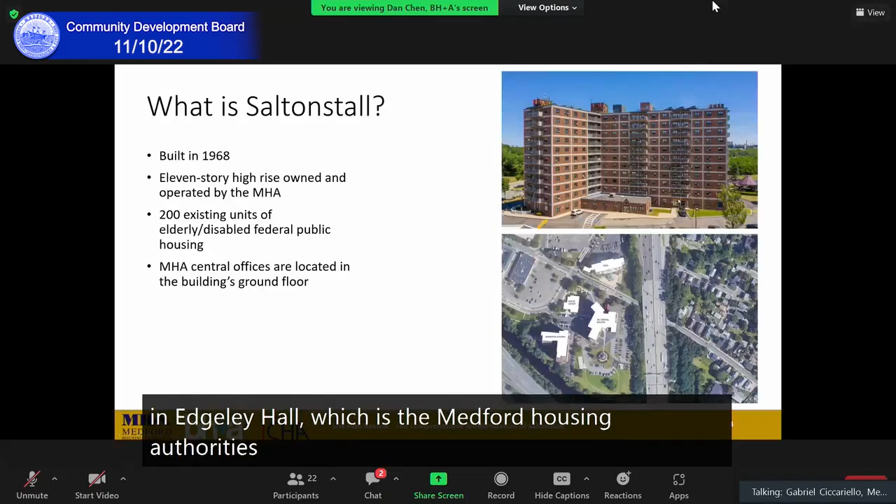Edgerly Hall, which is the Medford Housing Authority's largest community center, is also located at 121 Riverside Ave. It not only serves our residents, it serves other Medford Housing Authority residents within our portfolio and also the greater community. It gets a lot of use. We hold things like flu clinics, not only for our residents but for the greater Medford community, COVID clinics, food programs, exercise classes. It's a very busy building, it gets a lot of use, and the community room serves a great function to our residents and also the greater Medford community.

So the current building conditions—as you can see in these pictures, the building from far away looks okay, but when you get up close, it's far from okay. The majority of the brick is scaled and pitted. We've had to vacate several units because of severe water intrusion. The building structural beams need to be reinforced. The exterior masonry walls are severely deficient, with cracks and leaks. The ventilation system is poor.

The plumbing and electrical is all original to the building. The fire protection systems are not functioning properly and need to be upgraded just to get up to today's code, to be code compliant. The unit bathrooms have bathtubs in them, which are not great for accessibility and for elderly disabled people. The kitchens are in poor condition and warrant replacement. The common area corridors are not properly ventilated and do not meet ADA requirements. A portion of the units need to be upgraded to become fully ADA accessible and code compliant.

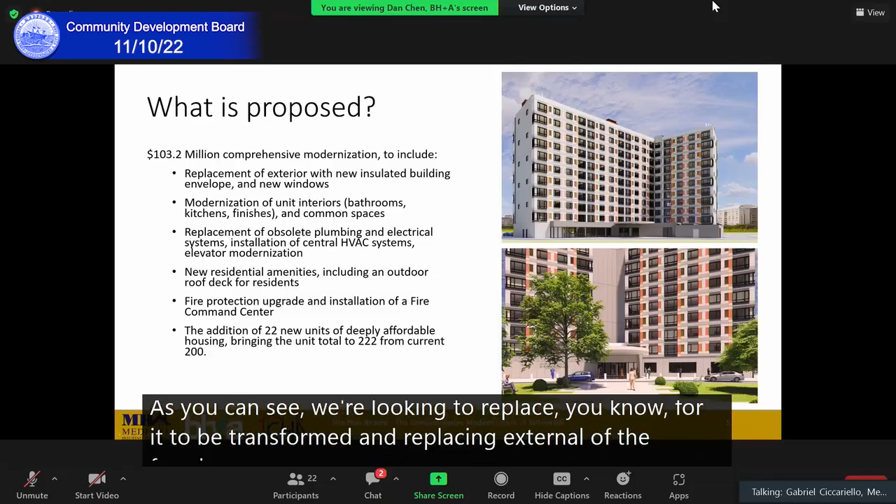So what is proposed? We just signed a guaranteed maximum price with our CMAR contractor for $103.2 million. We're looking to replace the exterior facade with a new building envelope and new windows. We're going to be modernizing the unit interiors, bathrooms, kitchen finishes, and common spaces, and replacing the obsolete plumbing and electrical systems. We're also looking to bring central air conditioning and heating, and modernizing the elevators.

With new residential amenities, we're upgrading the community spaces and adding an outdoor roof deck for the residents. We're adding fire protection upgrades and installing a fire command center. By adjusting the unit configurations and layouts a little bit, we're going to be able to add 22 new deeply affordable units within the building. We're not adding square footage, just reconfiguring the units. We're going to be able to go from 200 units to 222 units.

And so the project timeline. As I stated, we just entered into our GMP with our contractor. Our financial closing is anticipated to happen before the end of January, and construction will start soon thereafter. So early February, we are looking to start construction, with the anticipated end date hopefully May, could be June 2025. We're looking at a 30-month construction duration.

And so for our existing residents that are on site, the resident relocation process. We're looking to get up to 70 vacant units during construction. That's not going to happen right away, it's going to be a phased, eased kind of progression. But we're hoping by maybe the summer or fall of 2023, we get up to 70 vacant units.

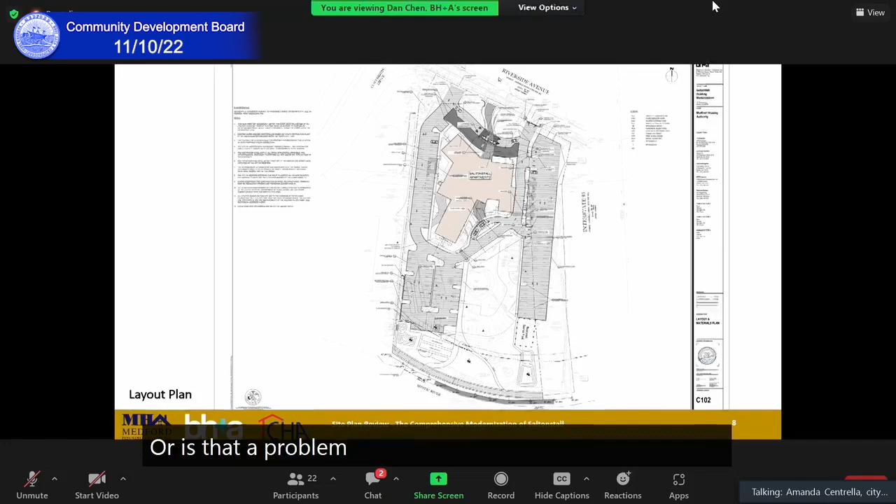Thank you. Good evening, Steve Sawyer, GM2. Amanda, would it be possible - sometimes it's easier for me when I present the site to have control and point and zoom. Would it be okay if I could take over and share my screen, or is that a problem? Yeah, no, that should work just fine. Okay, does Dan... okay, perfect. There we go. All set? Yep, we can see you.

Okay, great. So here's our site: Riverside Ave to the north, Interstate 93 to the east, Mystic River to the south, Clipper Ship Drive, and I believe there's an apartment building to the west. Currently, the site access is enter only and exit only, a counterclockwise circulation around the site.

As part of the building improvements, we're going to be reconfiguring the parking and improving vehicle access on the property. We are going to maintain the 2 curb cuts - those are not going to be changed. There's currently a front drop-off area that's going to be improved with a tabletop area, flush entering into the building, ADA compliant with no curb. There's also going to be a 20-foot wide fire lane added in the front. It would be a paver surface, decorative and appealing, but it provides access for fire trucks. There's a mountable curb here, so normal drivers would know not to drive over it, but it's easily mountable for a fire truck or fire apparatus.

As far as the parking now, it's on the outside and parks to the right. We're going to be shaving this down a bit - we don't need the width. We're maintaining parking here, and we'll be centralizing some parking down to the south. You can see in the faint red, that's the existing parking and curb line. Currently the circulation loops way down towards the river and runs back. We're going to tighten that up, keep it tight to the building, for better access for fire and more centralized access to the building.

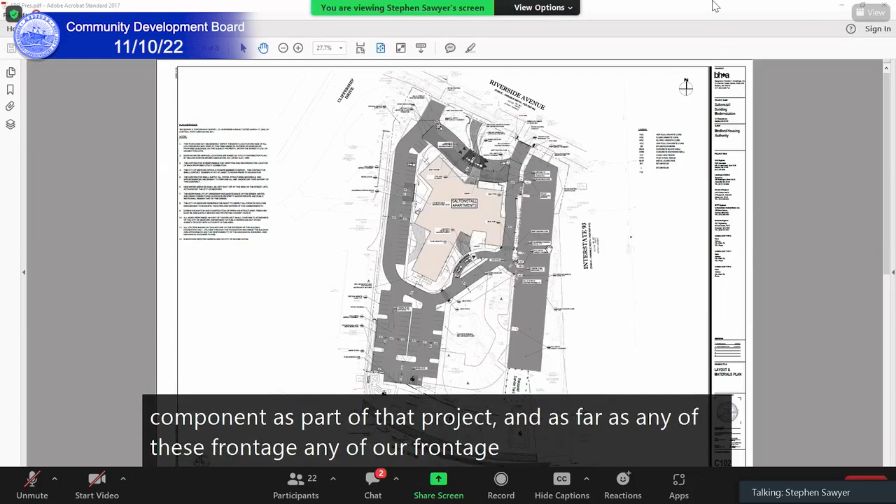One of the comments from engineering was about ADA along Riverside. Currently these have tactile paving and look like they've been replaced recently. The exit, though, those are not compliant, and we'll be bringing those into compliance as part of that project. As far as any of our frontage that's non-compliant, we'll be making those improvements to bring it into ADA accessible compliance.

Let's see... why is this... uh-oh, this isn't good. My thing just should say... boom. Just bear with me a second, hopefully it'll come back. Oh, that's not good.

Hold on, bear with me, I'm going to reboot my Adobe. Sorry. If you want, I can share while you talk. Yeah, I was trying to get to my next slide, hold on a second. All right, well, I guess that ain't going to work, unfortunately.

Okay, so as far as stormwater, as you can see, on the east side, on the west side, on the entry side, we've pulled the parking back a bit, the edge of pavement back. Currently, it's only catch basins that are daisy chained, which pretty much fire the water right out into Mystic River untreated.

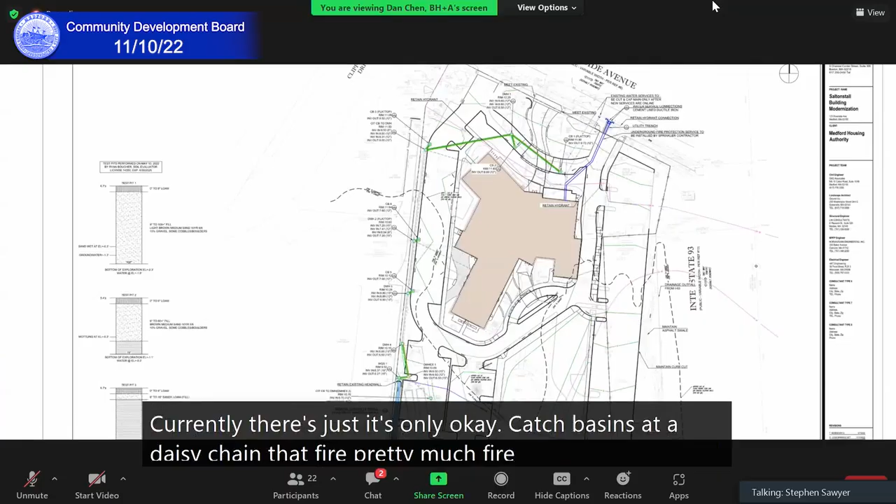If you zoom in, you can see the heavy green is the new drainage. We're providing new deep sump catch basins along the entry, and there's a new catch basin on the west curb line, the left curb line. These catch basins will be deep sump catch basins that remove the heavy sediment, and we're tying into the existing drainage via a 15-inch concrete pipe that runs down along the west property line as we work towards the Mystic River.

As you work down further south, you'll see the next catch basin. That catch basin will be offline. There'll be another catch basin offline, deep sump for sediment removal. At the very end, you'll see the last structure added will be what they call a swirl particle separator.

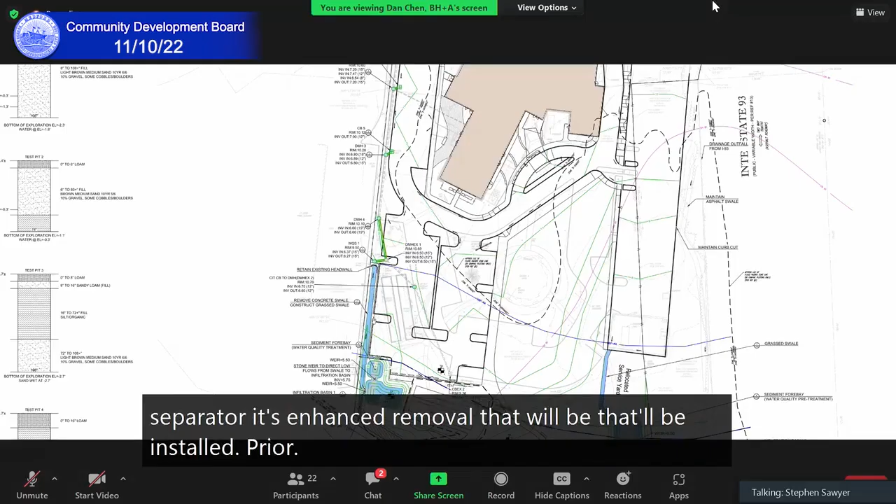It's enhanced removal, and that'll be installed prior to the water being discharged to the swale. Currently that's a paved swale, it doesn't provide any treatment, it just shoots the water right out into Mystic River, untreated.

So this is going to be a vegetated swale. It'll direct the water into this bioretention area here, where the water will be held, treated, infiltrated, and then during the larger events, it'll be directed back out to the swale and then into the Mystic River.

This system is going to be designed to treat all of the pavement, full treatment for the paved areas. As you're aware, DCR is working to put a trail along the top of the bank, and we'll be tying in. They're going to be making some improvements where the stormwater flows into the river, and we'll be tying into their improvements. On the east side, you can see there's another large basin.

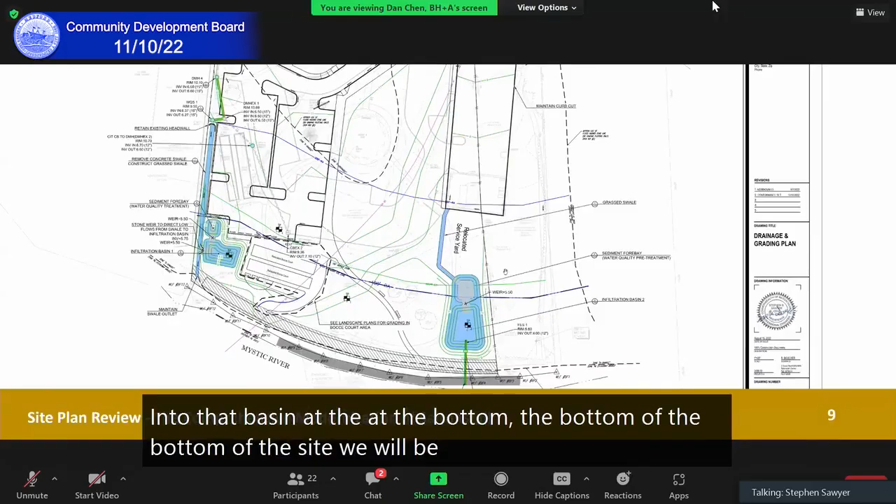That's going to take the eastern half of the site. Most of that site sheet flows over the parking through a swale and then into that basin at the bottom of the site. We will be installing a new overflow structure that will convey the water into the Mystic River. Once again, all of the paved areas will be providing the full 80% TSS removal and recharging stormwater back into the ground.

One thing of note, I think one of the comments Owen mentioned was resource areas. I believe you may be aware we're actually in front of the Conservation Commission now, so they really delved in detail into the stormwater. We did get some comments from Conservation, we are responding to those comments, and these systems will be updated.

To address their comments, they won't change much. Maybe they might grow slightly, but for the most part they're going to remain in both of the locations and operate as shown and intended on this plan.

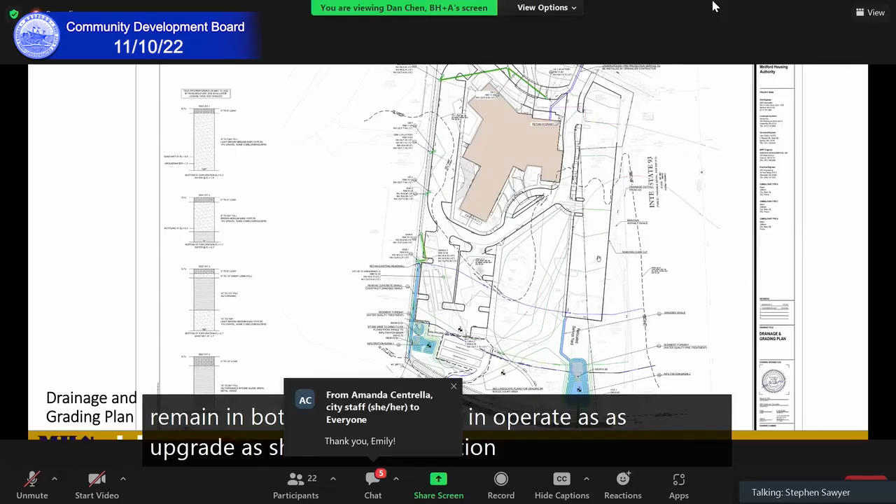In the comments, Owen, the city engineer, agreed with the approach, but said prior to building permit he'd be looking for detailed stormwater calcs, which were actually submitted to the Conservation Commission. I'll be submitting revised calculations probably on Monday, and I'm going to forward him a copy for review so he'll be reviewing concurrently with the Conservation Commission. And as far as the water utility off of Riverside, we're going to be providing...

You can see the blue.

This is going to be a new fire and potable water system. One comment was that we weren't allowed to do tapping sleeves. Owen asked for a triple gate, which has been added here. What that means is you add a gate on the existing line to the left and to the right, so you can isolate issues on either side while the building stays in service.

One item Owen brought up was providing a looped 8-inch water system around the entire building for fire service. We are not providing that. That was one of the comments we disagreed with.

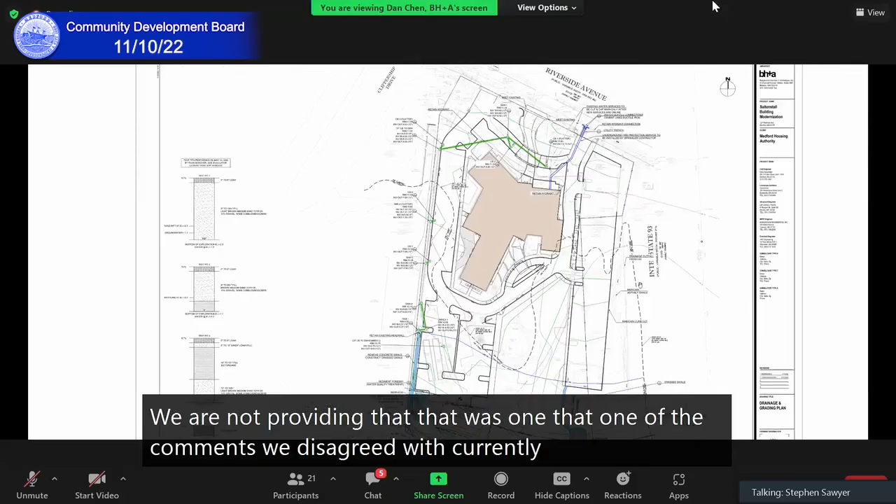Currently there are 4 hydrants at the front of the building, and fire connections all around the building. This design, including the access and fire connections, has been reviewed and vetted by the Medford Fire Department, and they're okay with the design as is. At this time we don't see the need to go through the expense of looping a water line around the entire building—that would be a tremendous expense that's not necessary.

I'm trying to keep it brief, so I'll stop my presentation now and take questions at the end. Great, thank you.

Next is landscape architect Curtis. Yeah, thank you.

The main landscape interventions are improving the building entry points, creating amenity space for residents, and the riverside area. I'll dive into each after the overview. Overall, the permeability of the site is being increased from 78,000 square feet of permeable area currently to over 80,000, or from 42% of the site area to 43%.

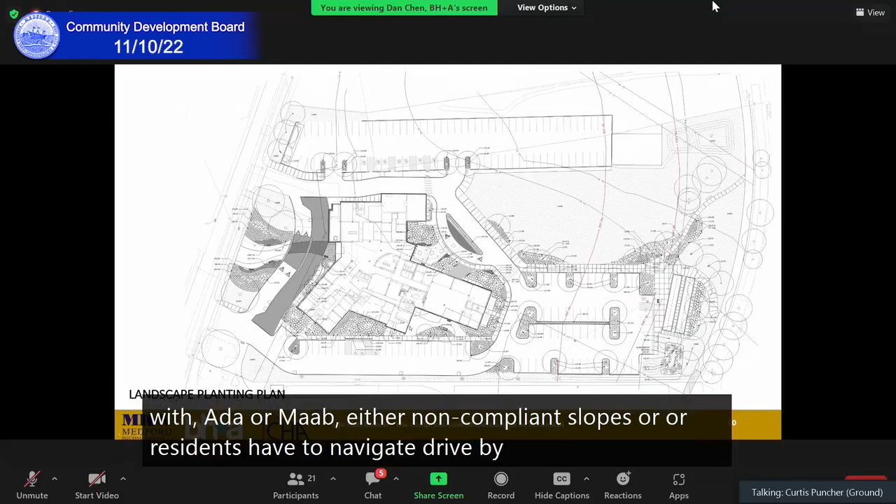Focusing on the building entries, a lot of the improvements are aimed at accessibility and drainage. Currently, many approaches to the building aren't accessible or compliant with ADA or MAAB—either non-compliant slopes, or residents having to navigate drive aisles to reach the building entries. So the two main building entries, front and back, will be flush conditions, so residents can be dropped off without navigating a curb or ramp—it's flush from the drop-off to the door.

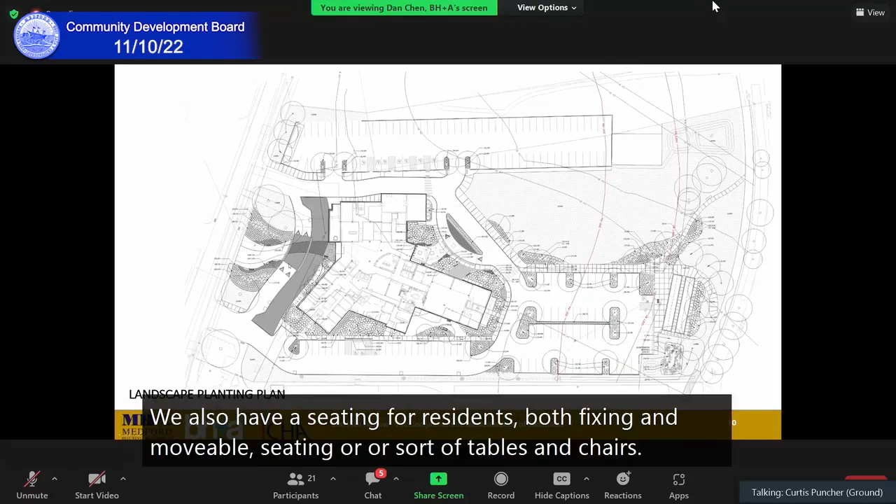Also at these sites, that's where we're concentrating our planting. We also have seating for residents, both fixed and movable seating, like tables and chairs, so we see these sites as opportunities for residents to socialize outside and gather.

Speaking of gathering, we also have a small resident amenity space adjacent to Edgerly Hall. The idea is that this community space can open up and spill out outside. We're going to have outdoor grills there and more seating opportunities—improvements for residents and users of that space.

Moving on to the Riverside area: we are moving the bocce courts, which are a City of Medford amenity, closer to the river. We'll maintain the dedicated parking spots for the bocce courts, and they'll be reconstructed at the originally constructed size for the courts.

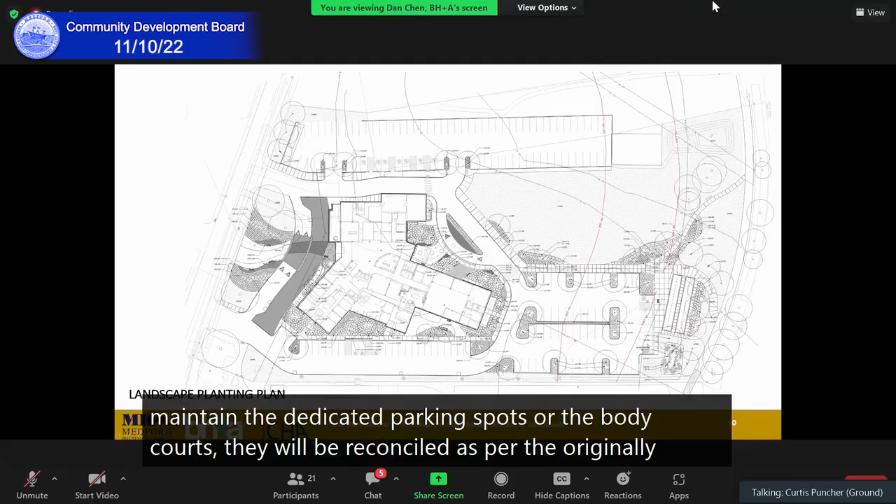We are adding seating opportunities around that site, concentrating planting around the bocce courts with some trees for shade. We're tying this in to the Clippership connection path along the river, seeing the site as a node along this path where users hopefully stop, stay, visit, and use the bocce courts.

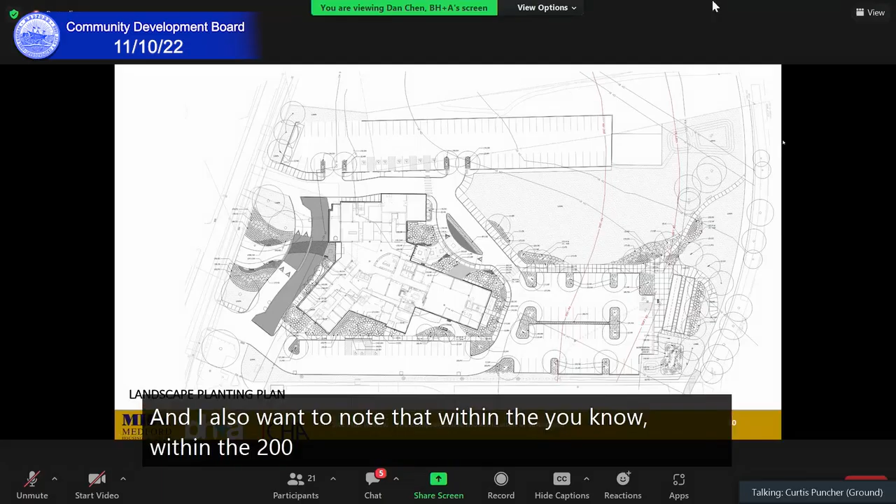I also want to note that within the 200-foot buffer of the boundary, the vast majority of the planting is native. We do have a small clump of hydrangeas we're not married to—if people have an issue with that, we're happy to change it out. But most of the planting there, about 95%, is native shrubs and grasses mainly.

Okay, I too want to keep it brief.

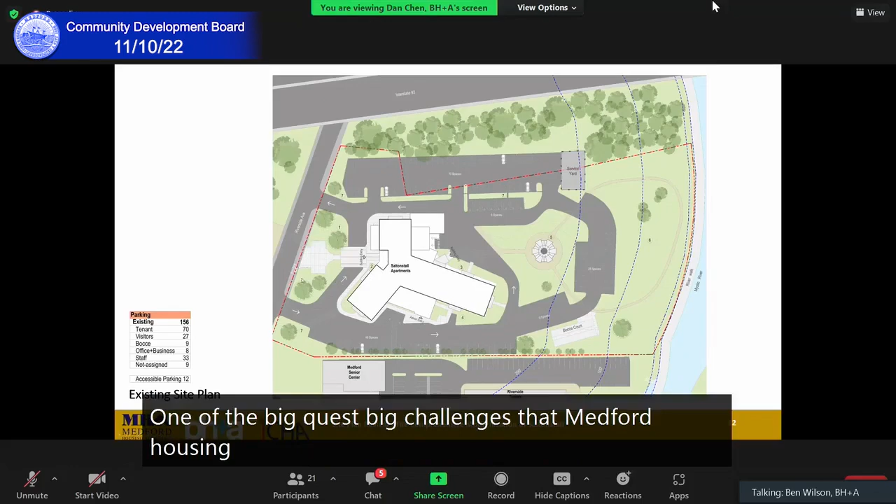The second issue is at the front of the building. One of the big challenges Medford Housing put in front of us is that this existing drive loop, which looks like and should be a nice functional driveway for drop-off access, is also the fire lane. So there was a real conflict—every time an emergency vehicle comes in, it would create a backup of traffic circulation and people double parking, and suddenly it's a log jam. That was an area we wanted to address.

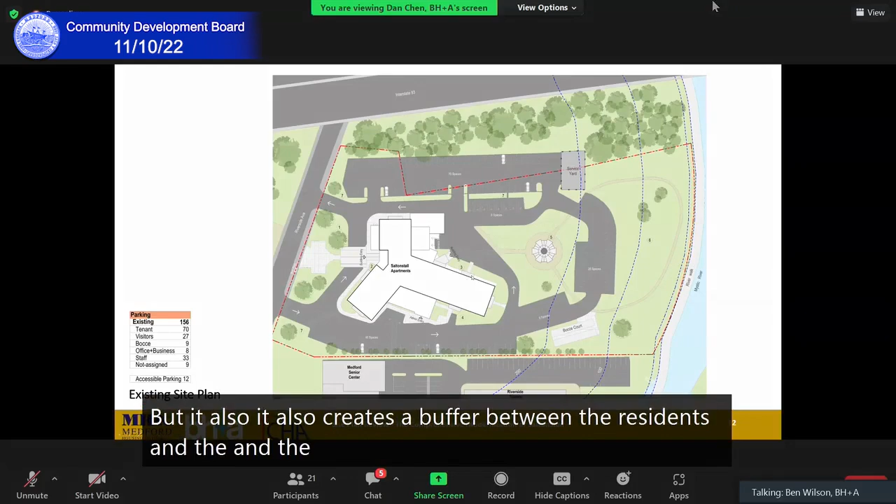The third item I'll mention is that the southern portion of the parking extends past the bocce courts and creates an outer loop of parking. It was felt that this aspect removed vehicles away from the building but also created a buffer between the residents and the waterfront amenity. So we were trying to create more of an expansion of the site outward in that direction.

Moving to our proposed plan, addressing the maintenance vehicle problem was easy—we convinced the housing authority to move their maintenance department somewhere else. That was a relatively simple fix, and the space that was the full maintenance department is now mechanical equipment and a smaller, building-specific maintenance area which accesses off the driveway instead of the pedestrian area.

The parking now circulates so that it feeds to identifiable walkways. One of the other problems from the original plan is there was no clearly defined pathway—unless they painted it out—just a lot of open no-man's-land of asphalt. We're trying to create more identifiable circulation that would be more functional.

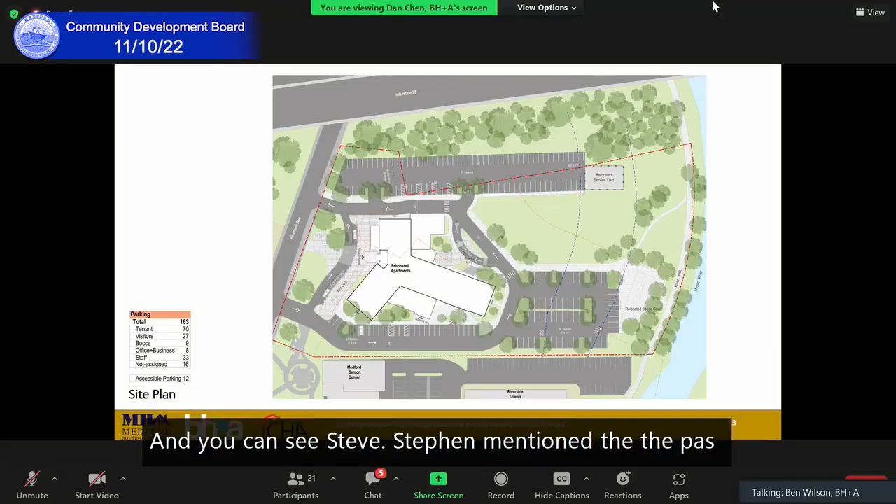You can see, as Stephen mentioned, the passage past the west side of the building where we flipped the driveway and the parking, so now the parking is on the building side of the drive aisle. That's also the area where there's an entry into the administrative wing, in that corner. The administrative offices are accessed from that point, and the parking serves that dual purpose.

Another simple benefit we gained from the parking modifications is that the 9 spaces corresponding with the bocce courts are now actually adjacent to the bocce courts instead of across a drive aisle. So we're trying to get things to be more defined and isolated.

The two entry areas of the building—we really have a double entrance. They're connected on the inside through the lobby space, but the entry from the north we're trying to reduce to bus traffic and foot traffic from town, as well as Uber and drop-offs. We've emphasized the south side of the building as more resident-oriented—this is where your front door is as a resident using vehicle access.

Another drop-off was mentioned by both Stephen and Curtis—the flush paving, tabletop access to it.

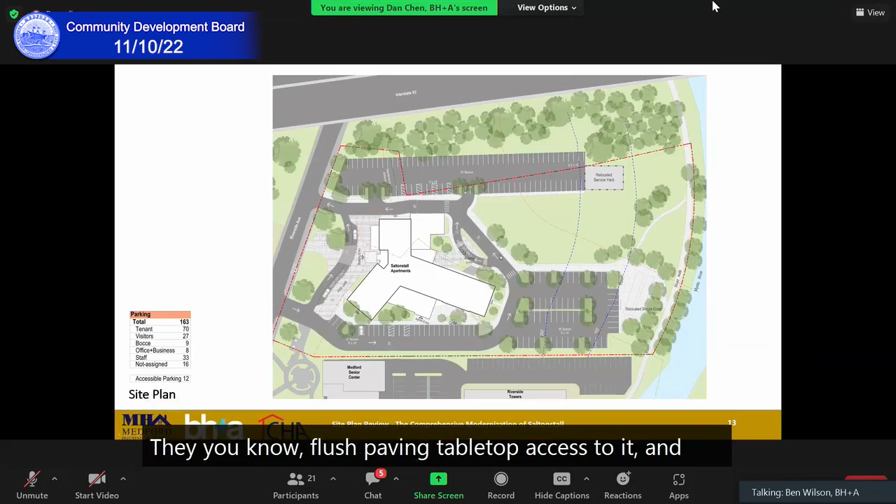The last thing I'll comment on regarding circulation and pedestrian flow is the connection from the public right-of-way to the riverfront. We've maintained a continuous walkway surface on the east side of the building—Dan's pointing to that access—and it's a nice, wide, very public sidewalk that accesses from the public right-of-way of Riverside Avenue past the bocce courts to the Clipper Ship Trail, with a couple of separate spurs to tie in additional options as walkers might prefer.

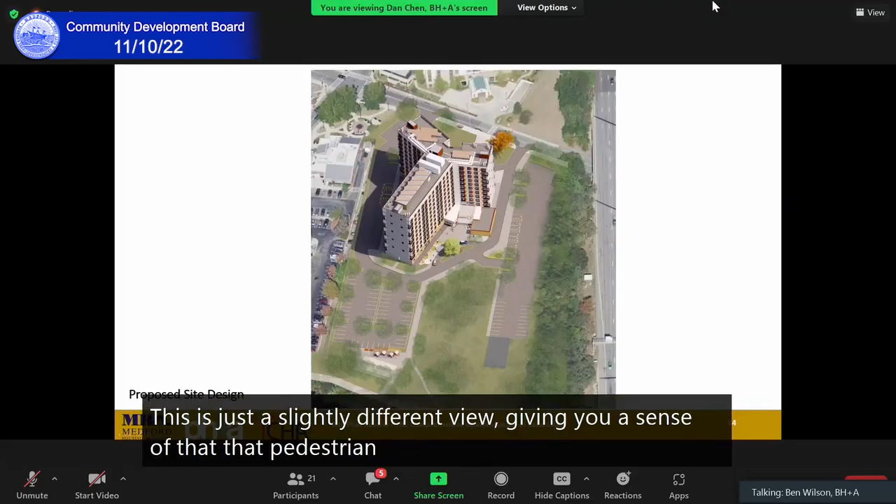So pedestrian wise, I think that's really where we tried to target it. This is just a slightly different view, giving you a sense of the resident entry area with the drop off and the maintenance building, and you can see it kind of projects out into that space. We've really been able to address the current maintenance use of that building, being specific to the building, which will be quite light.

So again, the circulation of the parking can channel onto a sidewalk and then a simple crosswalk into the building area. This slide shows the ground level of the building to show you how the two different entries on the south side and the north side tie together into a common space, trying to bring that outdoor public sense or community sense into that center area of the building at the elevator and mail area.

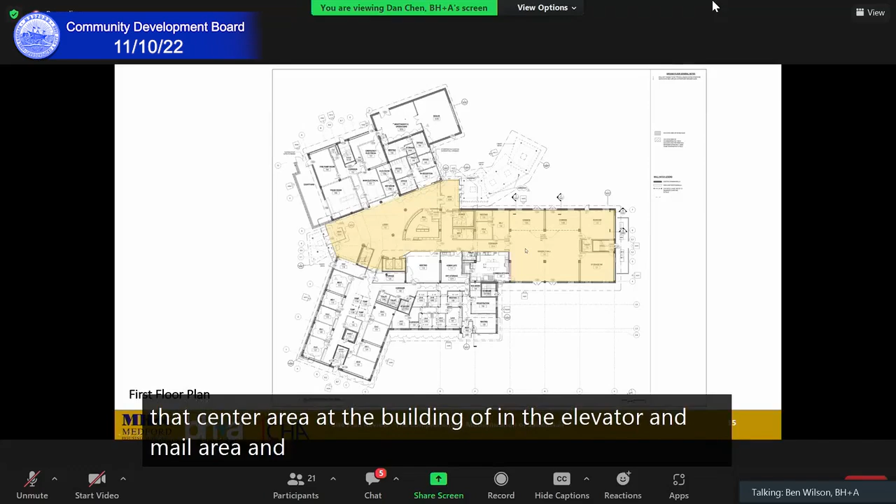And the south wing, you can see, is the Edgerly Hall spaces, which are multi-use type spaces. That's quite a large space and has a fairly significant capacity.

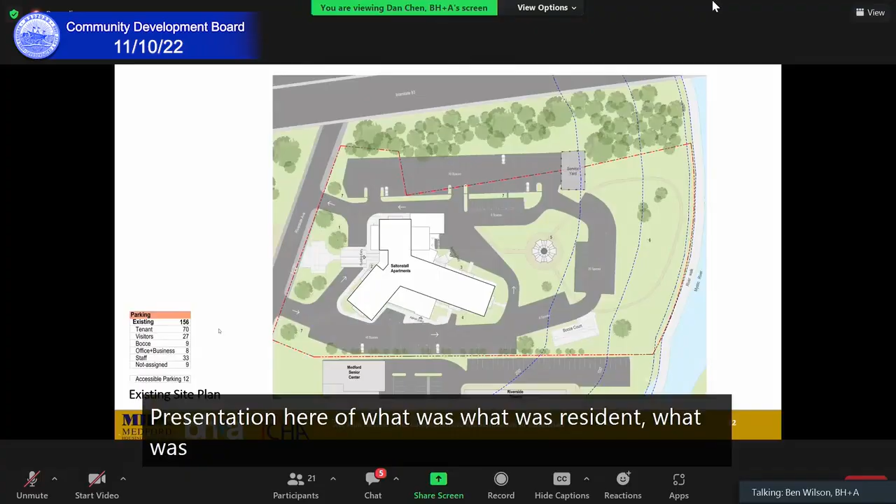Before you go, Dan, I'll just quickly comment on the parking. We started with 156 parking spaces, and there's a breakdown in the presentation of what was resident, what's office. So existing, we had 70 resident users, 27 visitors. The bocce courts were allotted 9 spaces. Office and business for the building itself was 8 spaces, and then staff for the Medford Housing Authority was 33 spaces, which left 9 unassigned spaces. Of all of those, 12 are accessible.

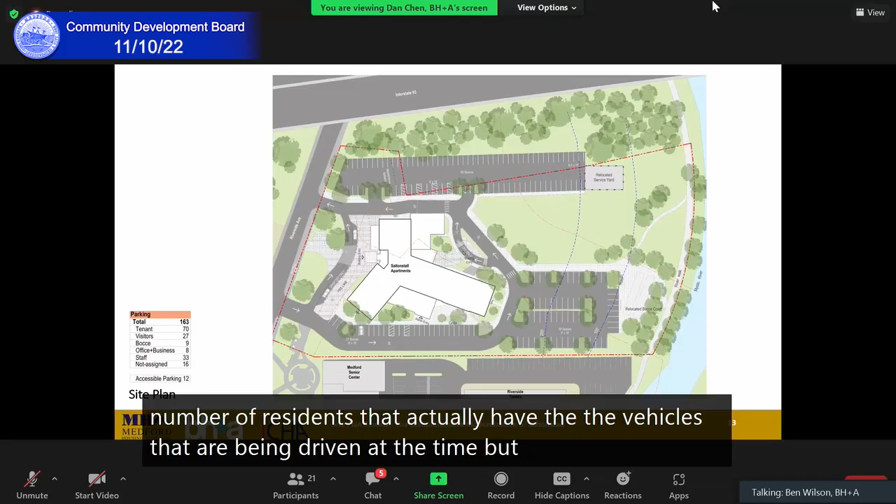So moving to the new plan: we actually picked up a few parking spaces through more efficient use of area, so we're up by 7 parking spaces. But as was mentioned, we're adding 22 units to the building, so we're adding 22 apartments at a 0.5 ratio, which means we're looking to add 11 spaces required. We maintain the 70 listed here because that's the number of residents that actually have vehicles being driven at this time. But in terms of code required spaces, we're about 6 spaces over what's required by code at this point.

So moving on from the plan, I think we can address other pedestrian questions that you may have. I think I covered the main points. There were a number of questions related to how we approach the exterior of the building, the envelope modernization.

Let's go on to the first slides. I'll start here with a recap of the challenges. There were a couple comments made about thinking the condition of the building was really pretty good. But as we got into the project, there are some significant issues. We knew there were problems with water, and sometimes that can be pretty easily addressed, but the extent of the water problems here is pretty dramatic. There are areas where water is penetrating through into the structure, and energy-wise it's really quite an inefficient system.

The water penetration has been such a long-lasting problem here that it's created some pretty serious structural issues, corrosion in particular related to the balconies. The framing members from the balconies, which were structurally undersized to begin with, have in some cases been reduced by 20% in terms of steel thickness, just from corrosion-related issues. Water is penetrating through the concrete systems and right into the floor areas.

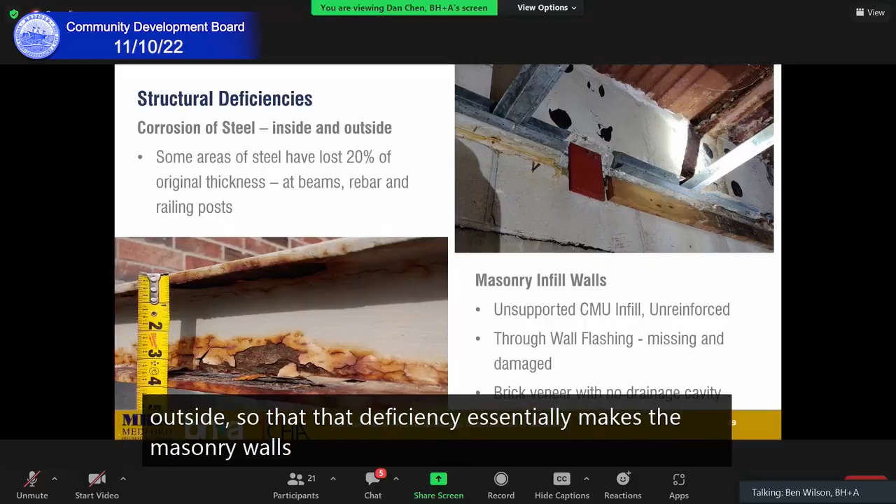The other aspect of the envelope strategy is to remove all, or most, of the brick masonry infill due to its condition. In terms of the upper floors of the towers, we'll be removing almost all of that brick infill. The reason we're doing that, rather than repairing, patching, and protecting, is that structurally the masonry walls were not reinforced and were not connected to the structural frame of the building, the concrete beams exposed on the outside. That deficiency essentially makes the masonry walls non-functional structurally from a design standpoint. So we have to go into the building and add brace framing to accommodate current code requirements and new loads. We're also removing all of that masonry to make a much more effective envelope, so there are really some benefits in doing that.

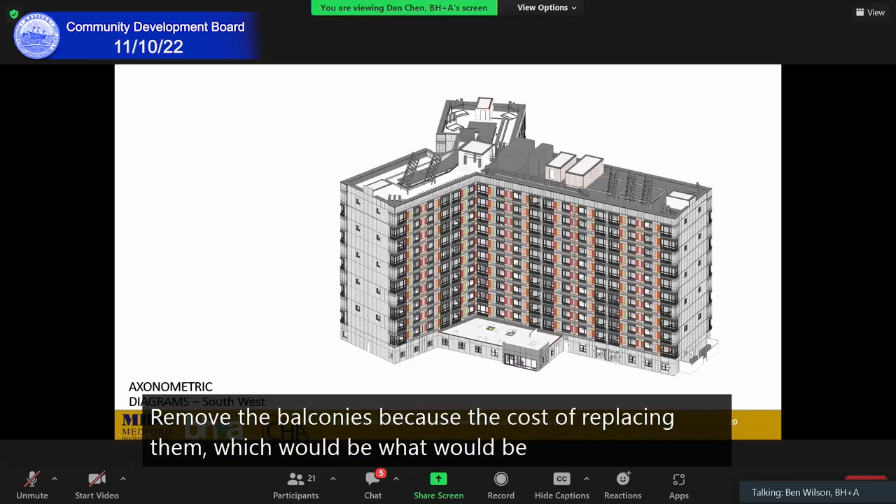And we removed the balconies because the cost of replacing them, which would be what would be required, is way outside of our reach of our budget.

So the building design, the way we've approached this, is we're proposing a fiber cement panel system on a rain screen. What that means is there's a framing system attached to the building wall substrate, and there's a waterproofing barrier, with the insulation applied outside of that waterproofing barrier. This allows the building to be insulated in a continuous way, without thermal bridges and whatnot.

The system drains and ventilates itself. So what we're adding is about 5 or 6 inches of wall material to the outside face of the building, and that's what we're referring to as a rain screen.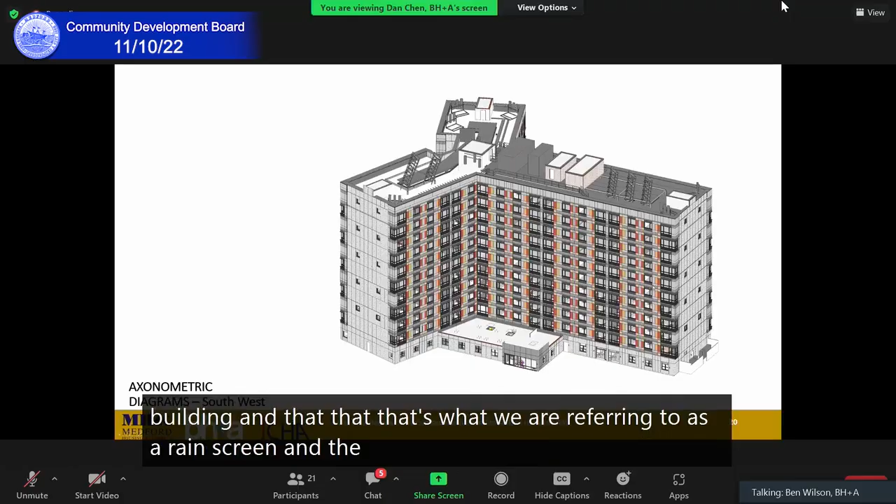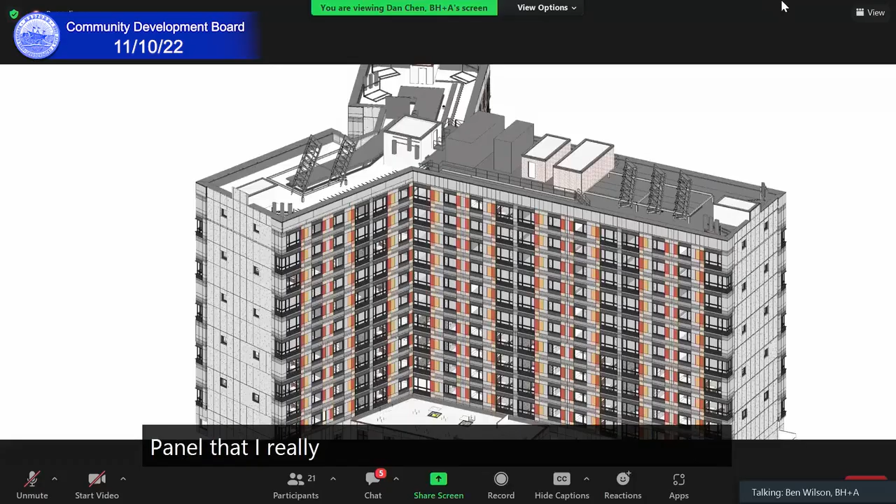The panel system, you may be familiar with fiber cement panels made more locally—I won't use any names, that could get me in trouble—but there are low grades of fiber cement panel and there are high grades. What we're dealing with is what's considered a high density, through-body-color fiber cement panel, so the coloration goes through the entire panel. The intent is that it's a much higher grade, longer lasting, durable panel that can really withstand the weather exposure of this environment with an 11 story building.

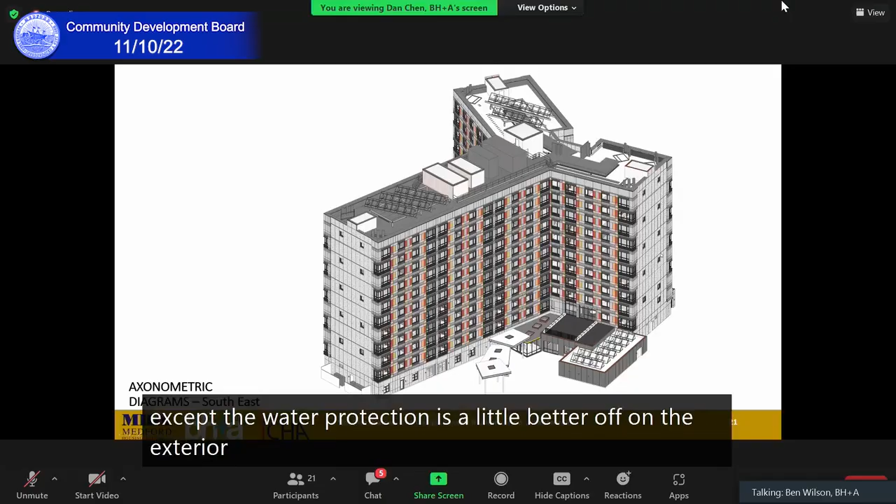For effort and cost savings in the project, dealing with the design we have, on the end walls of the big Y design, we've gone to an EIFS system. Quite often EIFS is kind of frowned upon, but the beauty of it is that it works almost exactly like that rain screen, except the water protection is a little better off on the exterior. It still drains, and it's still the same kind of insulation system.

So it's not a flammable foam like many people have seen EIFS applied as, but a mineral wool type system. What we're doing is really using the more costly panel system and rain screen around where all the windows are, on all faces of the building, and then using a cut section or cap at the ends of the Ys with this larger, larger-scale kind of panel that's EIFS.

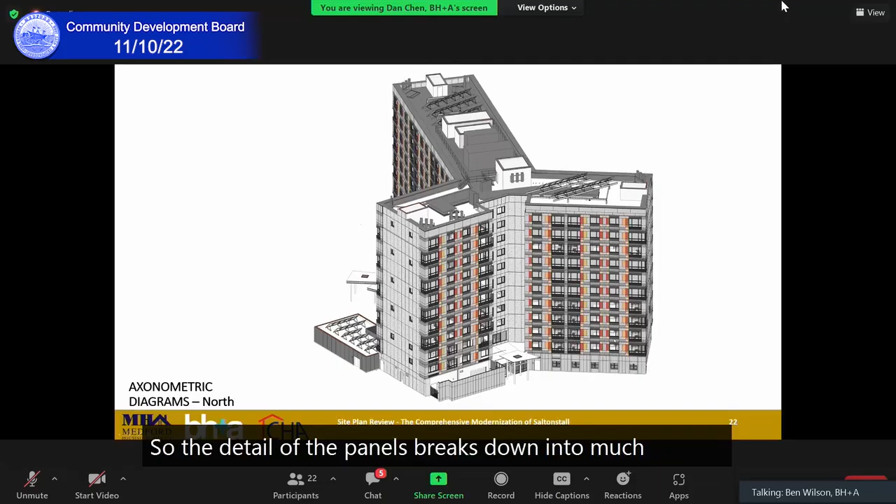And then at the base, when that all comes down, we're treating it as more of a monolithic, different treatment of panels. So the detail of the panels breaks down into more of a larger, rusticated aspect of scale at grade level—panel joints that are more related to the openings of the walls and the scale of that first floor level, which is a little taller.

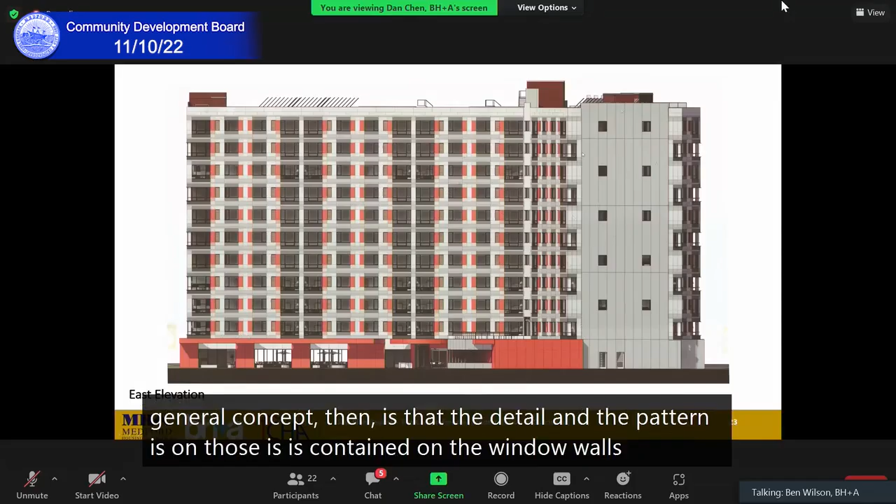So the general concept is that the detail and pattern is contained on the window walls. They wrap the corners. We have these corner windows that alternate floors, giving it a variety of scale.

So I think I'll stop here. I've probably talked too much already, but we can answer questions as they come on this.

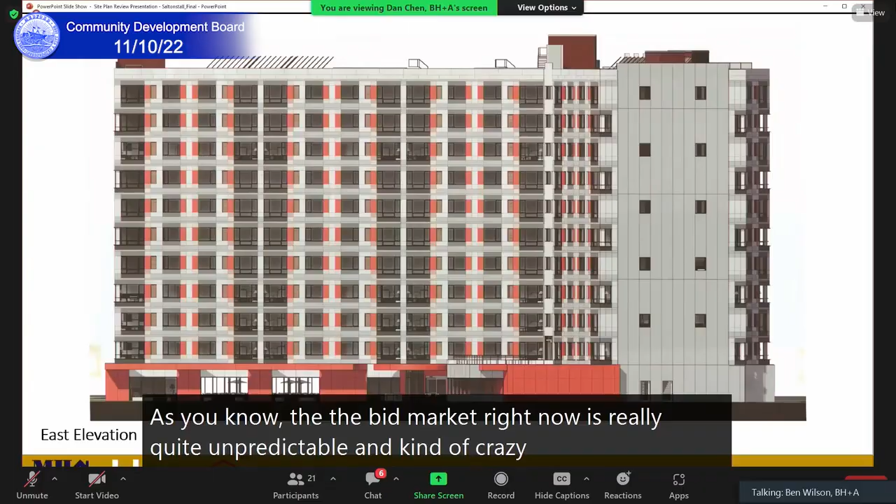So I'll comment on the end wall concept. It does change. One thing we didn't try to do is be true to, or attempt to replicate, that existing building in its form and design. It's very much a clear grid and frame and infill type of high rise now, and we really stepped back from that.

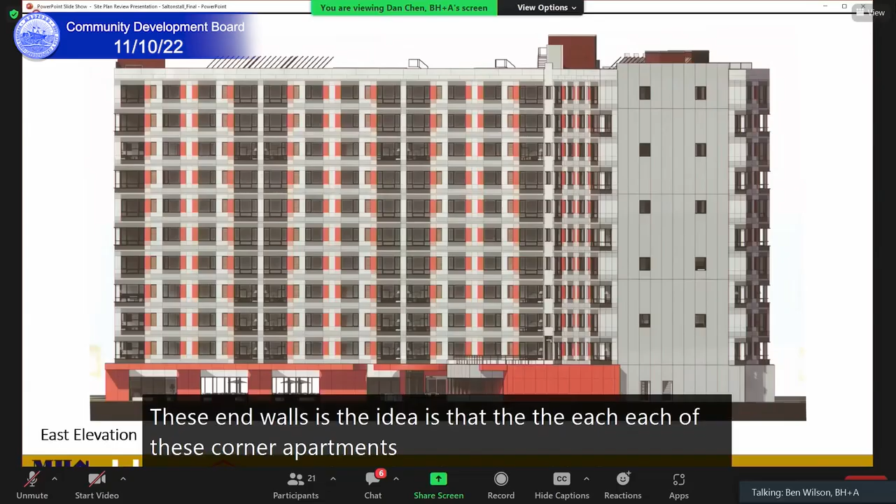And in losing the balconies, it was a change in that quality. But I think what we're proposing on these end walls, the idea is that each of these corner apartments, we're trying to maintain a pretty consistent quantity of window exposure for each apartment.

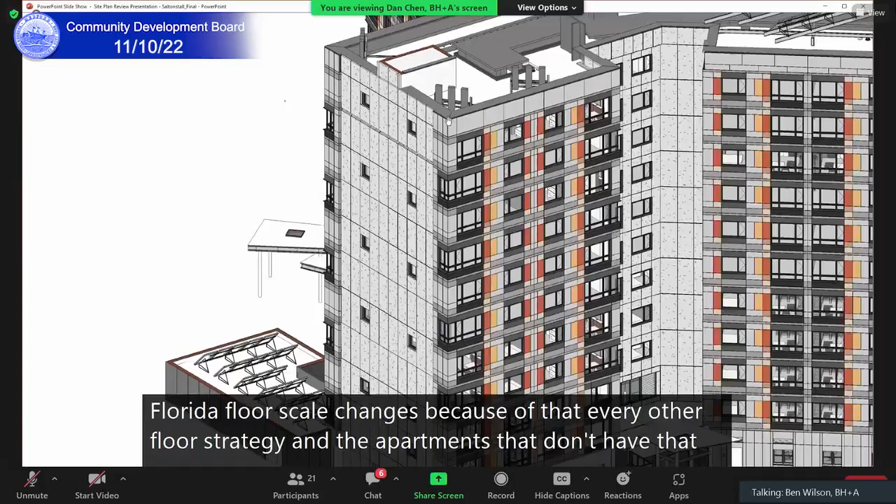So we have this wraparound window on every other floor, and that helps make a scale transition as you come around the end of the building. The panels increase in size, and the sense of floor-to-floor scale changes because of that every-other-floor strategy. The apartments that don't have that wraparound corner get a kitchen window instead. So there's a trade-off, but we're trying to keep the democratic fairness of what individual apartments have as an amenity. Yes, we lost that balcony texture on the ends, but we're taking a different strategy on how it works.

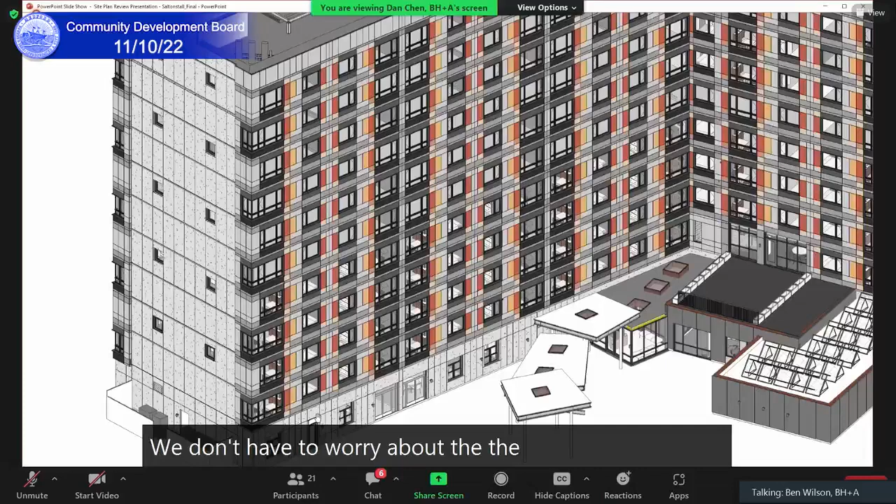I'll say a little more about the EIFS on the ground floor. That was also a fairly large area, so we applied it to the existing masonry. Since it's not 12 stories in the sky, we don't have to worry about the seismic stability of that masonry, so we utilized it for EIFS application as well. Again, the panels are larger, and we have a steel base so that the grade level is well protected. I'm quite comfortable with how it can work and how it may feel with the fit of the building.

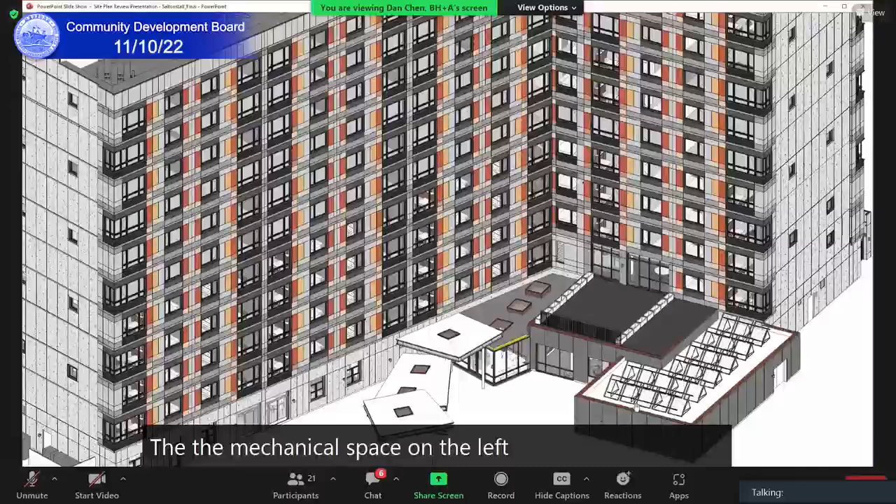One thing I'll add is that the detailed panel work we're playing with is also being applied to the fascias of the two entries, front and back, as well as on the left-hand side. Dan, can you point to that? The mechanical space on the left, at the south end of the building. These mechanical screens shown here haven't been completely modeled, but we used that detail of the window facade to create these screens, which are more of a decoration, if you will. Around the front side of the building, the screen that screens the trash enclosure would also have that same treatment.

In this rendering, it's not complete—it doesn't have the detail—but it would have the color and patterning translate more from the window walls down to that panel. In this case, it identifies more of the entry of the building, and from the other side, it identifies the sweep around the end of the building.

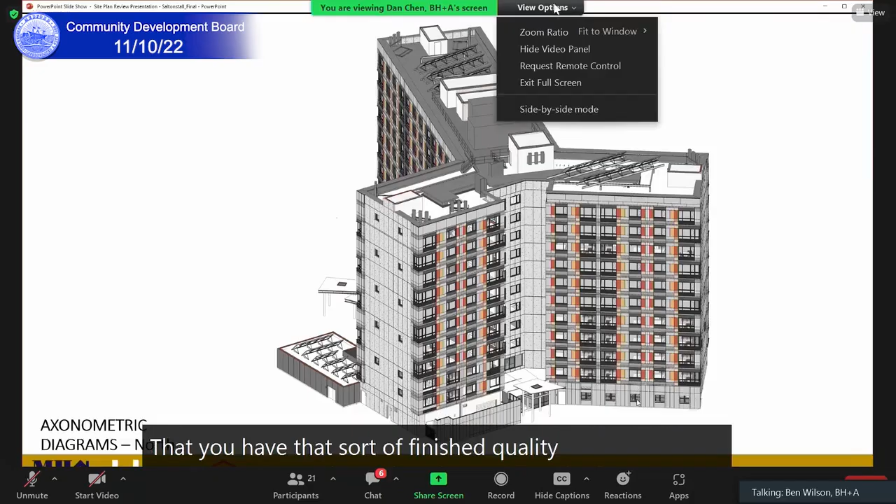I think that's kind of key to the how. One other comment: the front facade underneath, on the right-hand side, which is the front exposure of the administration area, is also fiber cement, so you have that finished quality of the fiber cement carrying across the whole front facade, and you don't have the EIFS at your hand.

If you go back, Dan, I'm sorry, one more comment. If you go back to that first axonometric you had from the back—the other comment I wanted to put out there is that what we've also done, go back to the other side, southeast side. Yeah, the southeast one, right there.

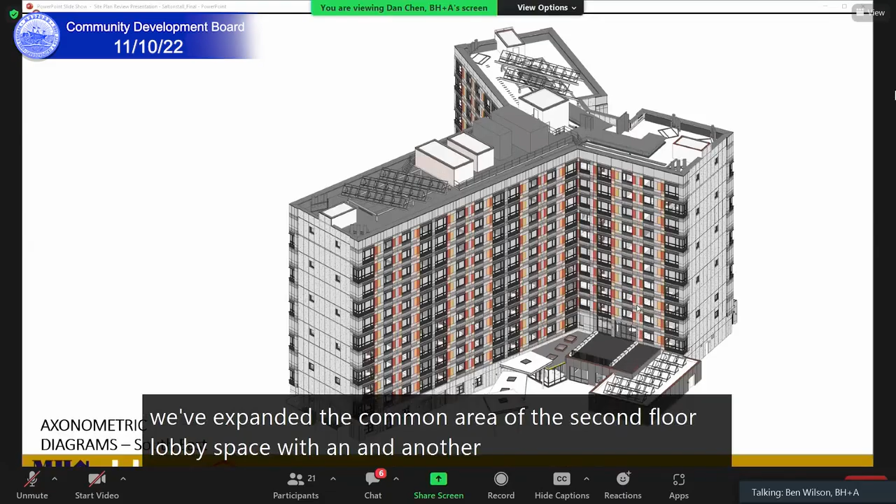We added a roof terrace, a common area roof deck, on the second floor, and we've expanded the common area of the second floor lobby space with an adjacent laundry room. So there's more of a community area at the second floor level that spills out onto this roof deck. What we've found in a couple of recently completed projects is that this is a real valuable space to the residents because it's private. It's kind of a gesture in replacement of their loss of their own balconies, but it does get used and is part of their community, as opposed to something at grade that maybe feels a little less protected.

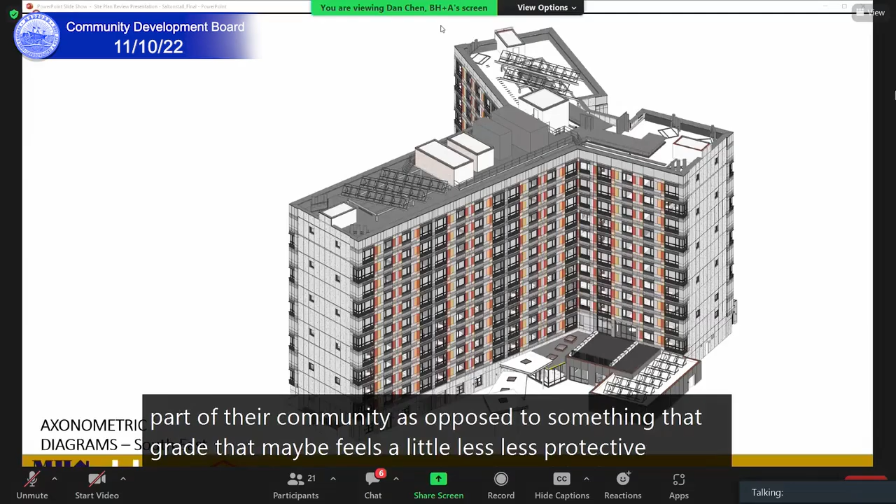I don't know if I got all of your answers, Klaus, but— Yeah, I think you did. How about the color, Klaus? You brought up the color.

Oh yeah, the color—I think in a couple of those renderings it's lighter than the actual materials we have selected. I think these elevations are a little closer; it's a combination of grays and some other tones. We're still working on the color right now, and to some degree we're at the mercy of the manufacturer that's ultimately provided by the bidder. Being a public bid, we have a little bit of lack of control on that, so we're still working on that color selection.

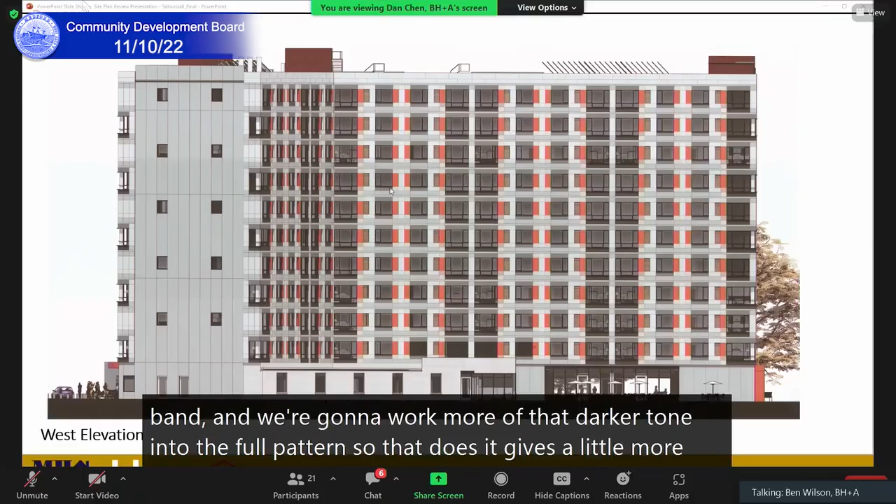The idea is that there's some reference to the brick of the neighborhood and adjacent buildings, and more of a richness in the pattern. This elevation doesn't really show the darker grays—we're pushing to get something quite gray. The sill of the big windows is a fairly dark band, and we're going to work more of that darker tone into the full pattern so it gives more richness and almost an effective shadow. There are some bugs we're still finishing on the color and pattern, getting the costs and everything in line.

Okay, thank you. My only follow-up comment is, before I asked the question, I was under the impression that the EIFS was going on the ends and maybe on those inside corners. It seems really risky to do it at the ground floor—it's just going to get destroyed. But I suppose that's MHA's maintenance problem going forward.

I just encourage you to keep looking at the color. I suppose you mentioned why you're removing the balconies—I'm sure you're as unhappy about that move as I am, because it seems like it was a really nice amenity. Looking at a street view, those balconies seem fairly well used, with furniture and plants and things. Beyond the functional use for the residents, I worry that their removal is going to really flatten that building to a point that it's conspicuously flat and uninteresting. So I'd just ask you to keep thinking about that—maybe some sort of expanded patterning in the EIFS areas to add complexity to the look of those ends, because without the red multicolored panels, those ends are going to be very flat, with those tiny little windows that are obviously either kitchen or bathroom windows. So thank you.

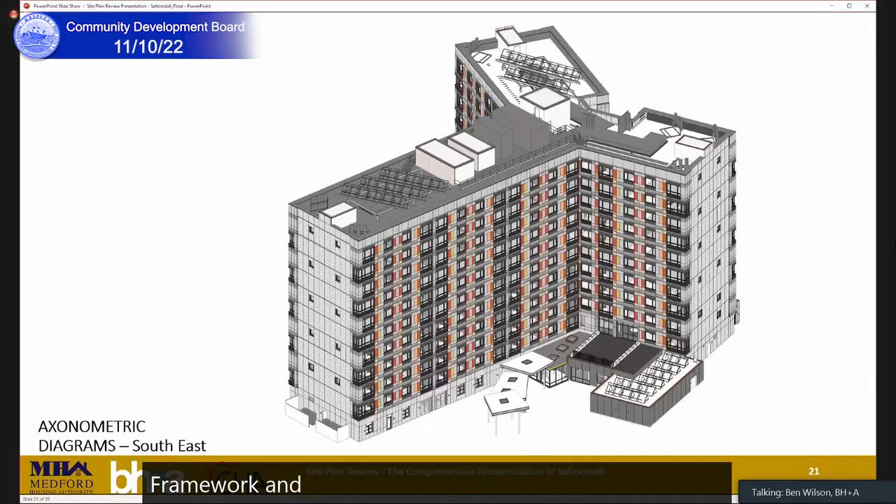A lot of what you're seeing in these images is a little bit harsh because there's no reference to the site, but there are really just a few pathways into these active areas, for instance this east wall here. There are really just two doorways serving Edgerly Hall that have access, and then it's landscaping on either side.

So we're trying to buffer some of the EIFS surfaces that have human direct contact potential.

I think if you go to the west side, Dan. I'm not sure if I'm answering your questions very well, but the entry around—go to the west side, Dan, the other one.

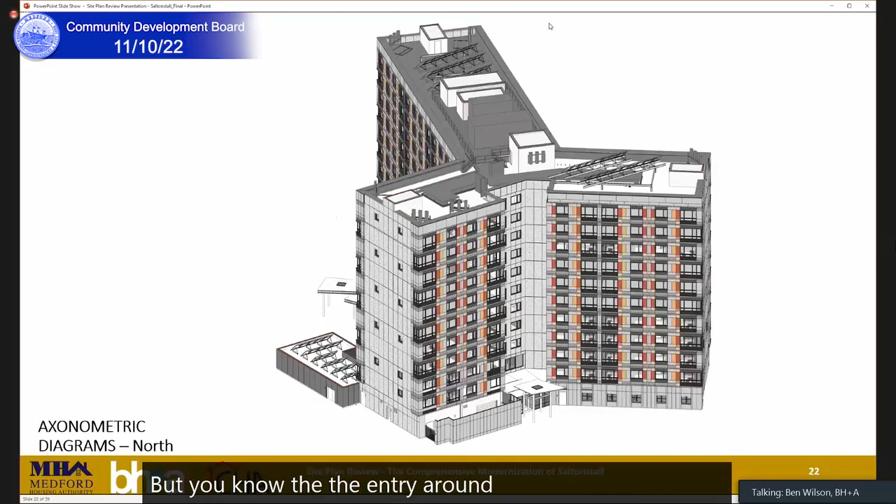No, there you go. The area around this is the administrative wing entry, and that box around it would be fiber cement panels. So you're kind of pushing where people are coming closest to the building, which is the doorknob, pushing the EIFS away from those spots as much as we can.

I thought there was at least one that had some red. It just had some—I purposefully pulled that back because that color was an earlier scheme that I apologize we didn't have updated.

So again, back to Dr. Kleiss's comment, we're really working through those color issues, and the EIFS, because that was the last transition we had to make, is the last color selection we're making.

Is it paintable? It does have different color treatments, does it not? Yeah, it's effectively a very heavy paint surface.

Our intent with these large surfaces, and this may address some of the issue, is that we're architects, so we like big flat, monolithic shapes and forms. For these end walls, we were conceiving very subtle changes of tone of the same color throughout all of the EIFS panels, so there's a bit of variegation or float in color between panels, which helps if you have to do repair work, you're not having spots everywhere. Secondly, I think it creates an interesting tonal quality to a big surface like that.

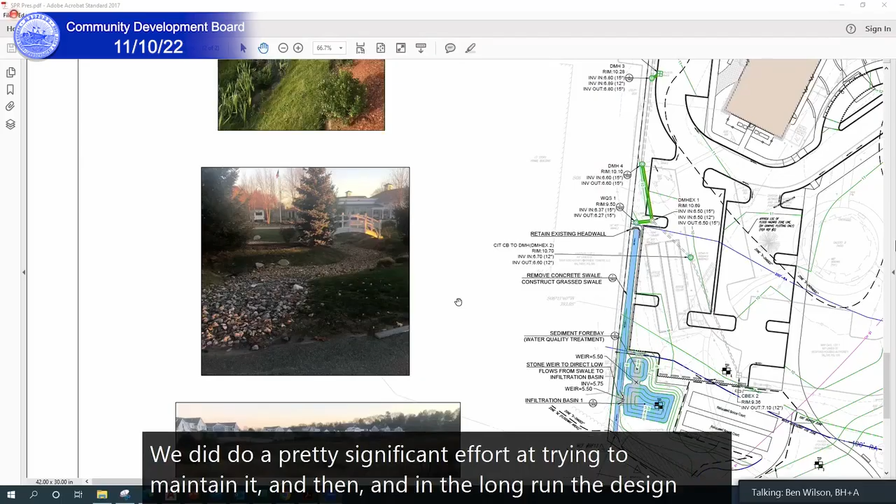So we did make a pretty significant effort at trying to maintain it, and in the long run, the design intent of bringing the bocce courts closer to the river, we felt, was worth that investment of moving them.

As far as my understanding, as part of the Conservation Commission, Heidi Davis is the chair and she's intimately familiar with the CPC project for stormwater. Nothing's been constructed right now. This area at the bottom is just a paved swale, and my understanding is they were going to convert that swale, a linear improvement, from a paved swale to a grassed or vegetated swale. We are actually doing that as part of the design, and also redirecting the water to a large bioinfiltration area here.

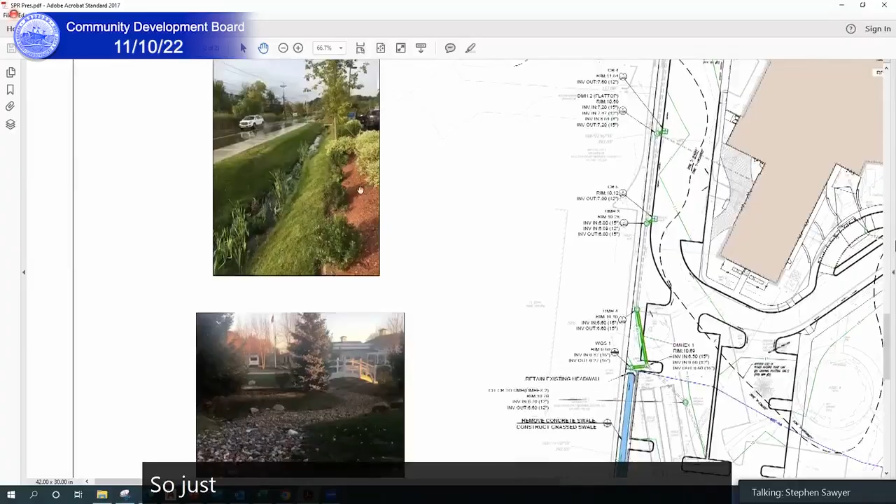For purposes of illustration, there's a grass swale I had designed in a project to give an idea - you have some uptake and some vegetation at the bottom, grass sides. This swale would be a little bit wider than this example, which is a bit narrower than what we'd be providing.

Also integrated into our design is a forebay and a bioinfiltration area - a stone area where you detain and infiltrate and clean the water prior to overtopping it into a bioinfiltration area. I'm working with the landscape architect now regarding the planting; right now I think we have some switchgrasses, some milkweed. Here's a project I had done - unfortunately it's in the fall, the grasses have all turned, but it ends up being a very natural low impact design.

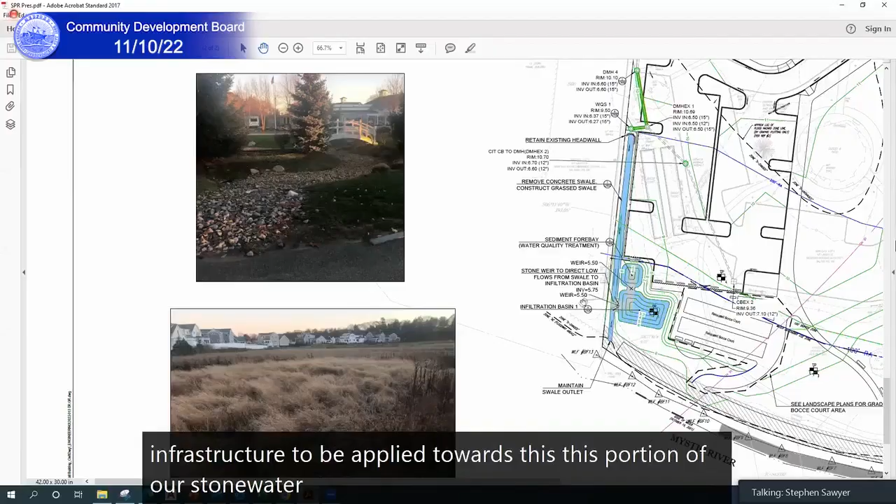So Heidi Davis, who was aware of that CPC project, I'm not sure if any money was spent on it yet, maybe on the design. But her comment was that what we're providing here is basically the intent of what that CPC funding was directed to do, and we'll end up paying for it in providing these improvements. We'd greatly appreciate and accept any CPC funding as part of this low impact design green infrastructure applied toward this portion of our stormwater, which I believe was part of that CPC project.

I think that's a fair question that could be brought to the committee - whether what you're going to design is consistent with what we funded in the past. It may be possible to explore the CPA award of that $40,000 being able to contribute toward the design of this system. That's a conversation that could be brought to the CPC via Danielle Evans.

Okay, have you heard enough about the bocce court? They did address it earlier in the presentation tonight. I just didn't know if you had follow-up, or maybe you'd like to hear more of what they said earlier in terms of its relocation and the other things they're doing to that area.

Yeah, perhaps. I apologize for coming late to your meeting, but it would be helpful. No, I wasn't saying it to be condescending in any way. I want to make sure you get the information you're looking for, and I think the team is more than prepared to give you some info that's relevant.

Dan, maybe you could put up the landscape plan, I think that's maybe the best way to show that. You want me to talk to that, Ben, or you got it? I'll start, and if I lose words, jump in.

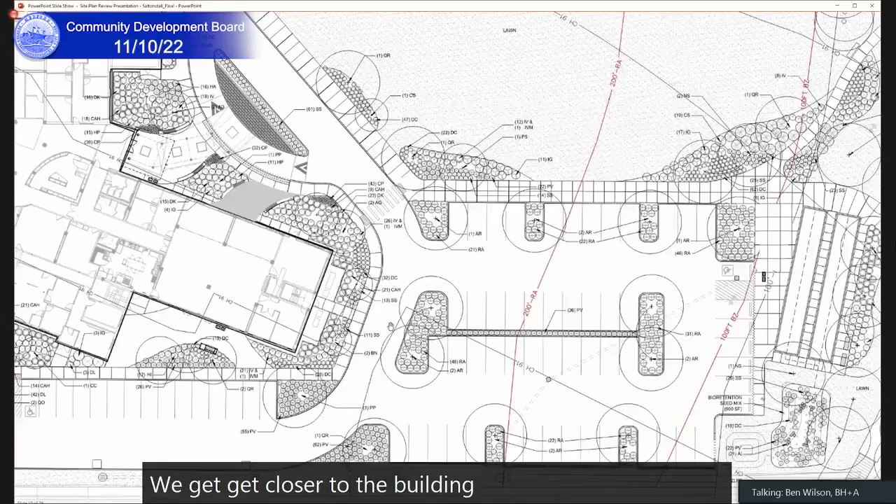What it also does is it allows us to expand some of the space around the bocce courts so that we have a larger gathering space, Dan, just to the left of the court there. Yeah, that area is sort of identified and prepared for some kind of gathering place, possibly in the future a structure or some furnishing, so more of a gathering space.

And the tie into the river walk, the clipper ship walk, ends up being something that's a little more obvious and integrated into that public space of the bocce courts. The other benefit that's come with this move is that it puts the parking allotted to the bocce court directly adjacent to the bocce court and the clipper ship walk there.

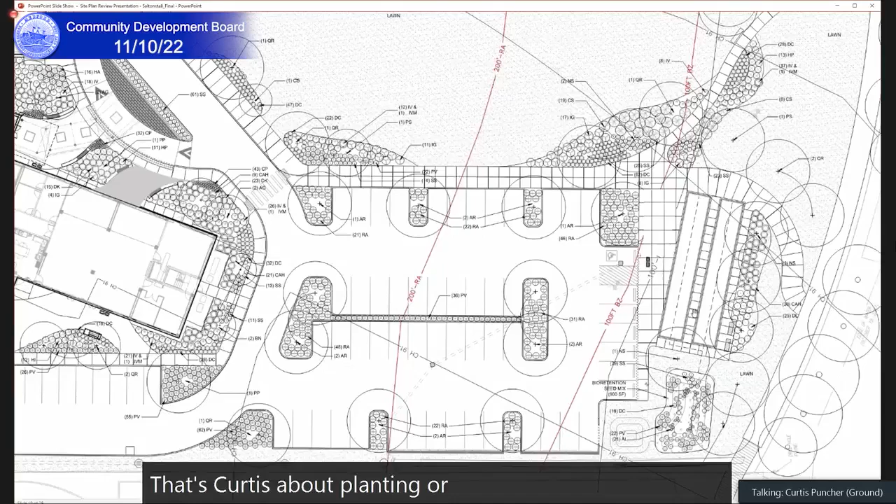So I can say that. Maybe you have some other thoughts, Curtis, about planting or... I'll just note that we have tracked down the landscape architect who designed the original bocce courts, and we are reproducing their construction details and material specifications. So to whatever extent possible, we are trying to reproduce the bocce courts as they were constructed initially.

So may I ask what is the cost to reproduce the bocce courts? I don't have a breakout of that. I think we can probably find it, or have them do it. It was included in the overall site hardscape work.

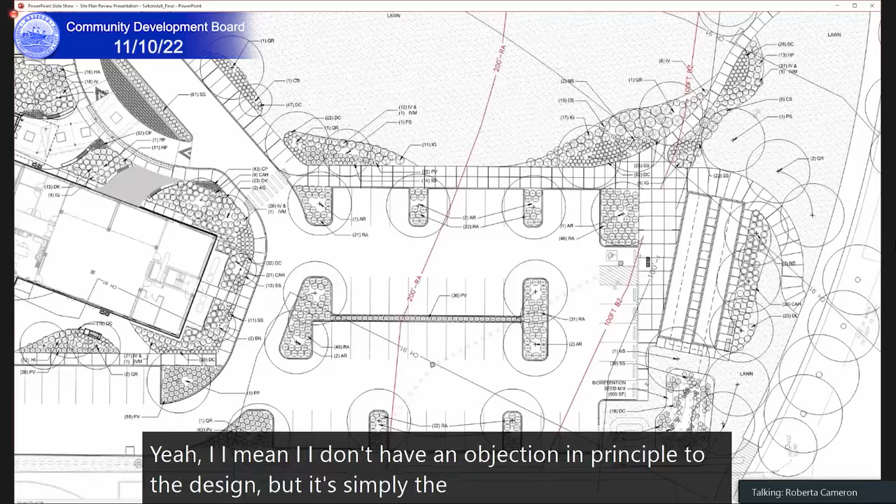Yeah, I mean, I don't have an objection in principle to the design, but it's simply the investment that we've made then being unmade is the principle that our committee has a concern about.

So Roberta, let me speak to that a little bit. So I know so far the MHA had covered 100% of the construction costs. We have not received reimbursement yet for that. Let me speak with Jeff, our executive director, about if it's more regarding the financial commitment from CPC. Like I said, we have not gotten reimbursement; we have covered 100% of the construction costs.

I see. That sounds very weird, because when we do CPA projects, usually the invoices are given directly to the city and the city pays them directly. No, we cover the cost because there's something regarding, we haven't finalized the bocce court agreement with the city yet. So that was holding things up. It's a couple of years old, and we have covered the cost for that in the last two years.

I think some A&E fees may have been covered. It's so long ago, but I'm pretty positive, and I'll get confirmation, that we have paid for all of the construction costs and have not gotten reimbursement for those.

I would just like to say, I think I'm on CPC as well as Community Development Board representative, and I think this project is just highlighting that we probably need to speak amongst the CPC if there are mechanisms that can be put in place in the process to ensure that any funds invested in projects, if there needs to be a look ahead or understanding of future projects and how you deal with situations like this. It feels like a bigger discussion because there could be, I think there have been other past projects where this has happened, and there could be more. I think it's more about communication and figuring out a mechanism to handle this in the future.

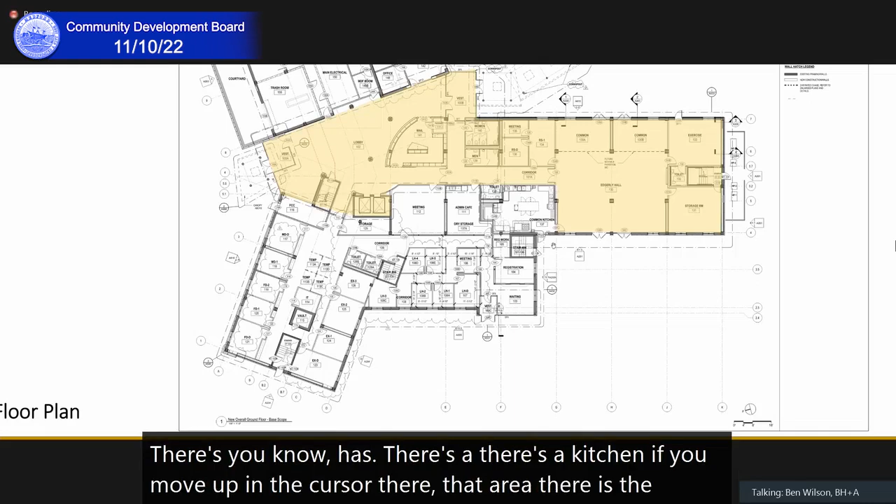There's a kitchen - if you move the cursor up, that area is a community kitchen in place to serve the Assembly Hall. The Assembly Hall is the piece of the long wing to the right, and it's actually a bigger space currently, but we had to break it up a bit because of structural bracing that has to come down to grade level. So functionally we've made it modifiable with partitions, creating a couple smaller usable spaces. This is all Medford Housing Authority property, so it's publicly accessible, but access is controlled by Medford Housing Authority.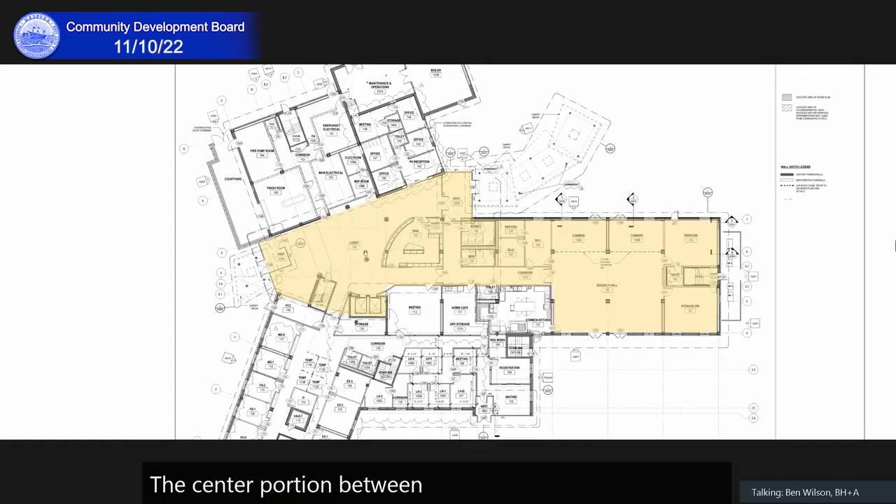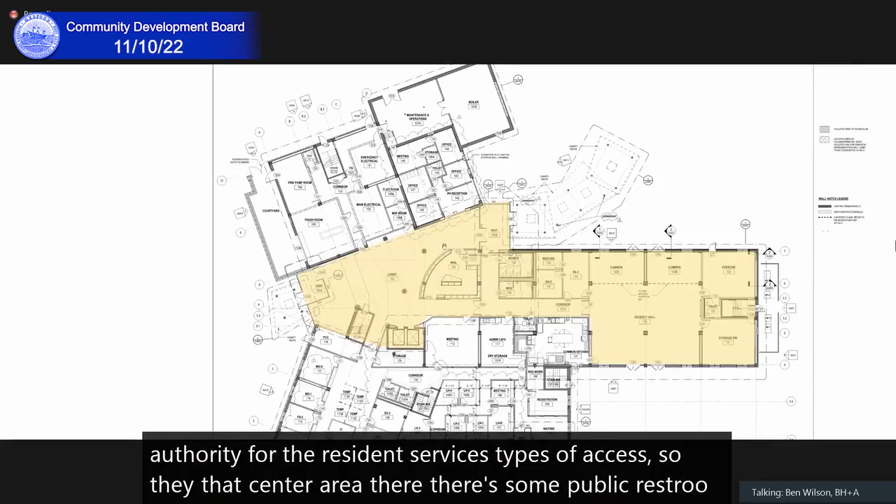The portion at the top of the plan is all the maintenance area and equipment, and then there's a cluster of offices right there - a couple of maintenance offices, as well as some operational offices for the housing authority for resident services types of access. That center area has some public restrooms, mail space, and a fairly large lobby with circulation, some seating areas, and a couple of TV locations.

Now, access into that lobby is controlled. There are two points of access - one on the north side of the building, one on the south side, left and right. The direct public access is into the vestibule, where they have to be released in by a resident or employee. So does that answer the question of accessibility?

Okay, yeah, it definitely does. Thank you. And I believe the Medford Housing Authority uses the Edgerly Hall for various functions, sometimes outreach programs or programs related to some of their other facilities. So they have people coming from all around the city, from other Medford Housing facilities, to attend programs or functions at this space.

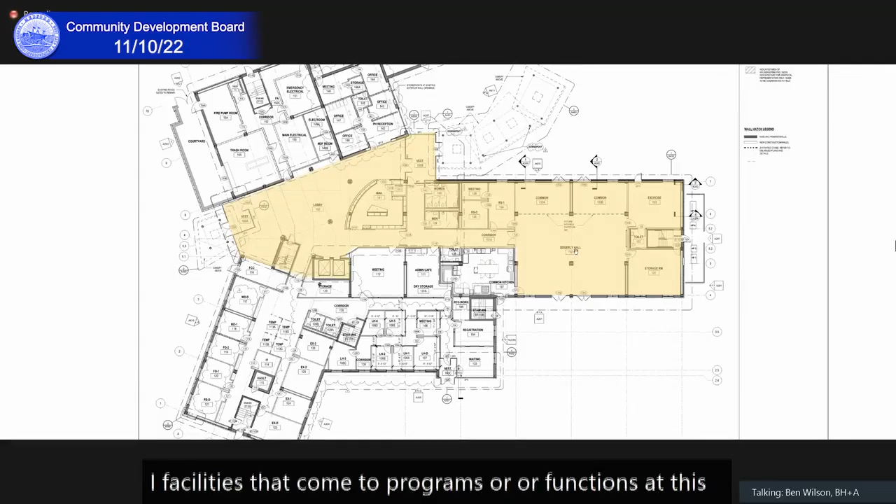Which is one of the reasons why we've maintained some of our parking overflow. We have a little bit of excess parking beyond code, and that's because there are times when they have functions within Edgerly Hall with other housing sites, and they often max out the parking capacity.

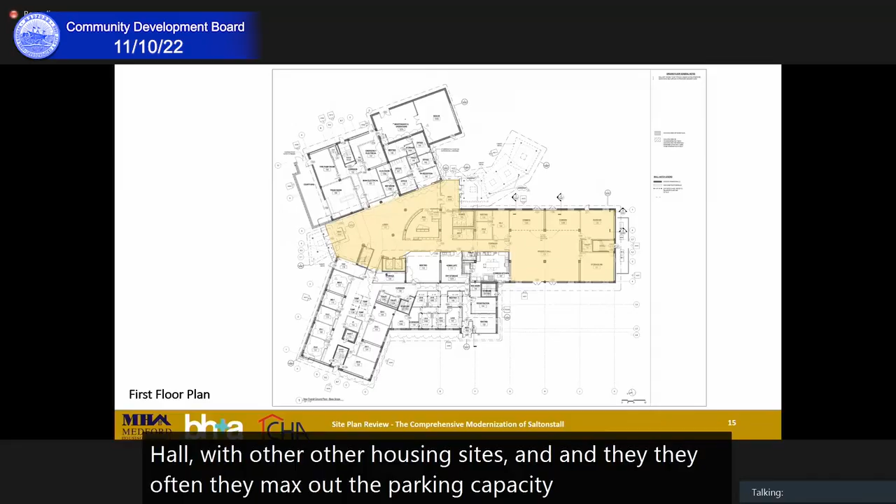I guess I can address the infiltration areas. The stormwater report initially was designed for infiltration, basically bioinfiltration areas, basins. We did test pits out there, and in the areas of the two basins, it's good, decent gravel fill, and the groundwater is substantially below—I think it's like 4 or 5 feet below the bottom of our basins.

So there's good well-draining material underneath the basins. You can see the test pit locations on that. One thing about this system is it's under quite a bit of scrutiny between Owen, the city engineer, and Heidi Davis with the DEP, as well as the chair of the Conservation Commission. This is subject to the Mass Stormwater regulations, so as such, it's kind of a convoluted, gray area in the regulations—infiltration basins are not allowed within 50 feet of a waterway.

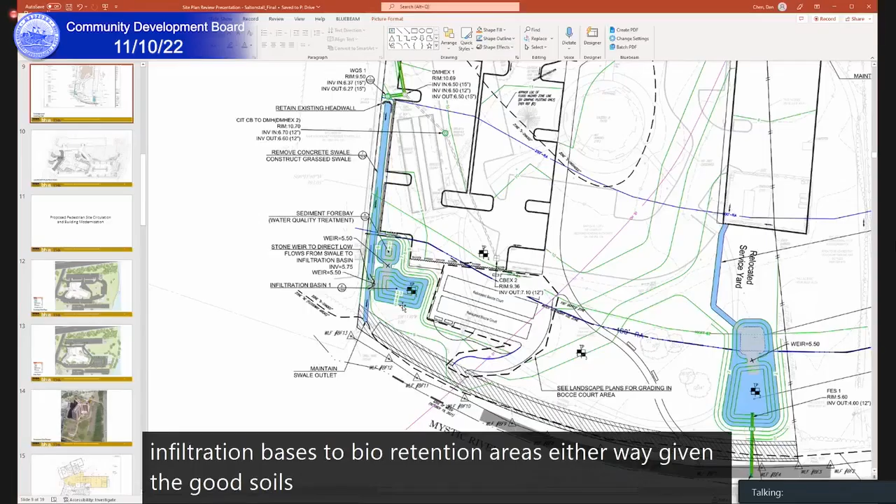So that being said, we're in the process of redesigning those basins from infiltration basins to bioretention areas. Either way, given the good soils below, they'll drain readily from underneath. I'm going to be working with Curtis, and I'm still confident these will drain dry.

What you need to be very careful of—I've done plenty of rain gardens or infiltration areas, bioretention areas that are lawn, and they work. They look great, particularly in areas where you have decent gravel underneath. A lot of times where I've gotten into trouble with rain gardens is the actual material, the compost, that filter soil media.

You have to be very careful about putting too much compost in it, and very careful about over-compacting it, because what ends up happening, if it's not installed properly, is that soil media ends up being quite impermeable, and your basins don't drain.

I'm acutely aware of that and need to be very careful. If we do go to a bioretention media, I typically like to not put as much compost in it, just because you need to be careful of that soil media becoming impermeable.

We're looking to have them drain—I want them to drain, typically within 72 hours for sure, and more so I'd like them to drain after a storm event within 24 hours. But that's those basins right now.

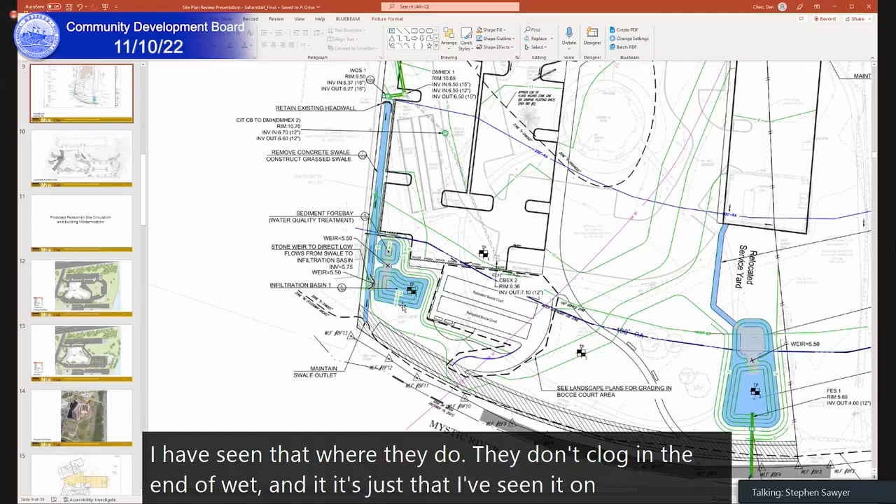But I appreciate the comment. I have seen cases where they do clog and end up wet, on a couple of occasions, and mostly that's because of over-compaction of that soil media when it's installed.

That's it. Sorry, George, what was your last question? Thanks, yeah, my last one was a question about a trash can along the DCR path. I'll let Gabe answer that one.

Yeah, I know we currently have some trash cans by the bocce courts, and that's something I think we can definitely take care of—maybe put one at each end of our properties towards the back.

Since we're on the subject, what is the timeline of that path versus this project? Maybe Alicia knows a little bit better.

Yeah, I actually checked again recently. The DCR has every expectation that it's going to go out to bid this winter and be built in the spring. I have the bid documents. What it's waiting for is a final easement agreement to be signed with 99 Riverside. When I checked last week, they were still trying to get that easement agreement. It's the only thing holding up bidding out that project and going to construction.

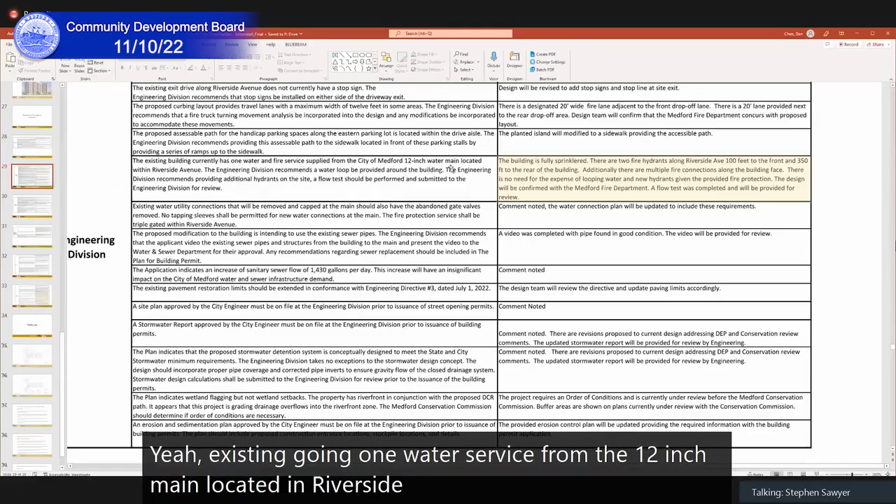It started as one fire and potable water connection, which currently are two separate connections to a building. You provide a fire connection and there it is. The existing building has one water service from the 12-inch main located in Riverside. The engineering division recommends a water loop around the building and recommends providing additional hydrants on the site.

There are 2 hydrants on the site, at the front of the building. Our feeling is, and we believe the fire department agrees, that what they have is enough: there are 2 hydrants on Riverside on either corner, plus hydrants in the front of the building. Yeah, it's right about there. And then there are connections on the building itself where the fire department can hook up in the rear of the building.

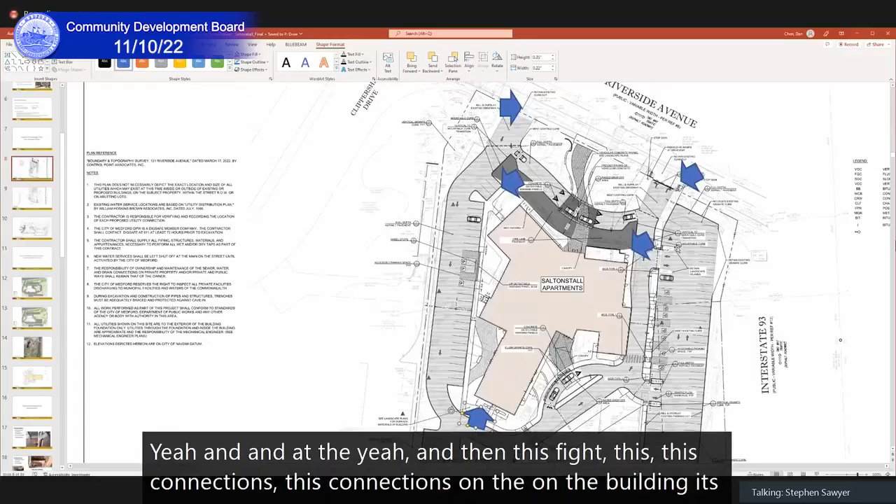From that meeting, Owen agreed. He said he would not push for it if the fire department was okay with the design as is. It's not an insignificant cost to loop an 8-inch ductile iron pipe around the building. We're talking about around 1,000 feet of ductile iron pipe, which, given the cost these days, is a significant added cost to the project.

If I may, I'd add it's not just the cost. It wouldn't be used for that, because the fire department specifically told us they would like to access the front of the building, where they have 2 connections they would connect to. They would never go to the farthest possible location to connect, since they already have connections on all 3 sides of the building. They always want to be closest to the building, at the first entrance, not looping around. That's why our main goal when we met with the fire department was actually to create a specific access lane for their trucks, because over the years they've seen people jamming exits so they cannot access the building.

I'm sorry to interrupt. That's helpful. Thank you.

I think I'll respond to your question, David, or maybe it was Dina's other questions, about whether we are in disagreement with anything. I don't believe there are any other questions we actually disagree with. I think some of the questions from the Historic Commission on the envelope are a little more subjective, so we'll be submitting all of these responses to you and can respond further as needed. But I believe we addressed them all.

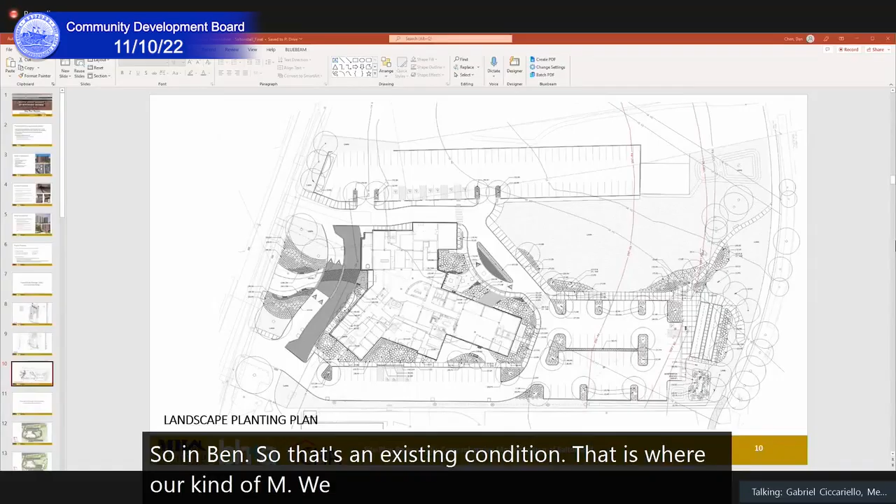So that's an existing condition where we have large trash containers for large items. We have vacancies, and a lot of residents leave furniture behind, so we put couches and electronics back there for weekly or monthly pickups depending on the material. I think we also have some vehicle storage. Is that what we're referring to?

Yeah. Dan, could you go to page 11 or 12 on the PDF? 12, I'm sorry. Now, as I look at Google Earth, I see it.

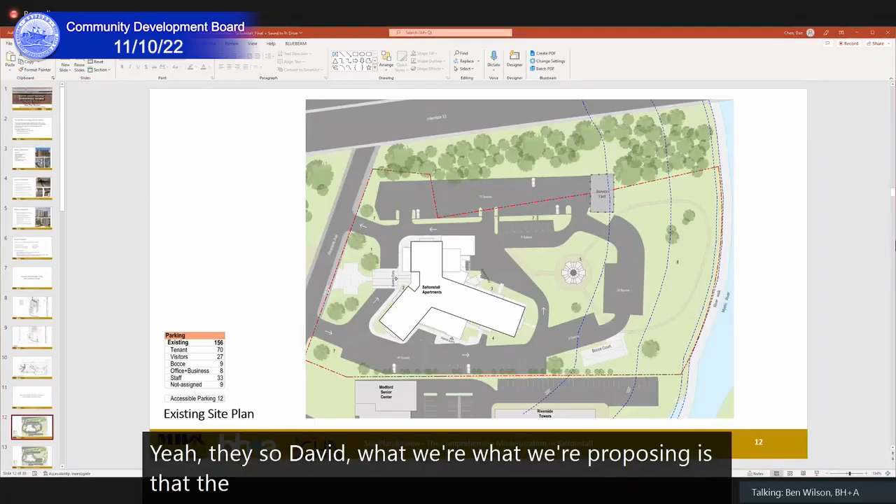David, what we are proposing is that what is currently the space used now, as Gabe mentioned, for equipment storage—I think it's for the entire campus of properties for MHA, waste and recycling equipment, etc.—that zone is going to become an extension of this parking lot, which adds about 7 or 8 spaces.

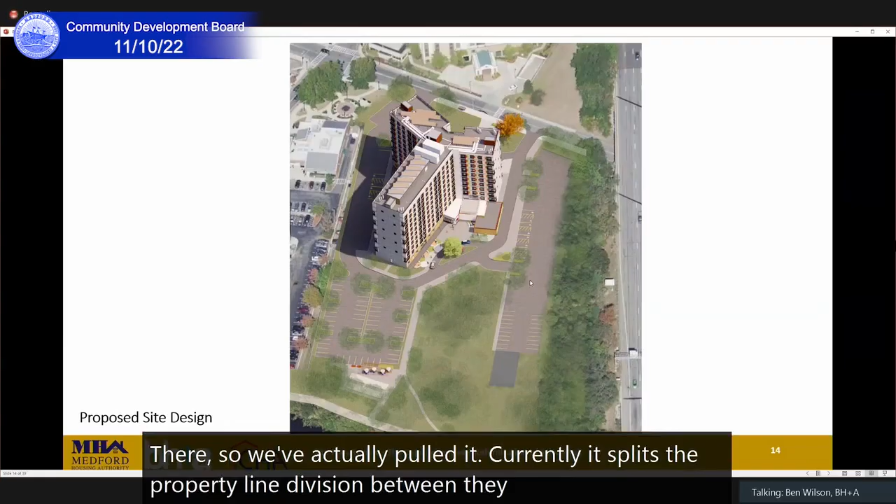And if you go to page 12 or page 13 on the PDF, what we've done is that area that was the storage area becomes parking spaces, and we've extended the storage area—which is gravel but I believe it's non-permeable—into that area. So we've actually pulled it back. Currently it splits the property line division between the highway department and Saltonstall, and what we're doing is getting it in so that space is entirely on the property of the MHA.

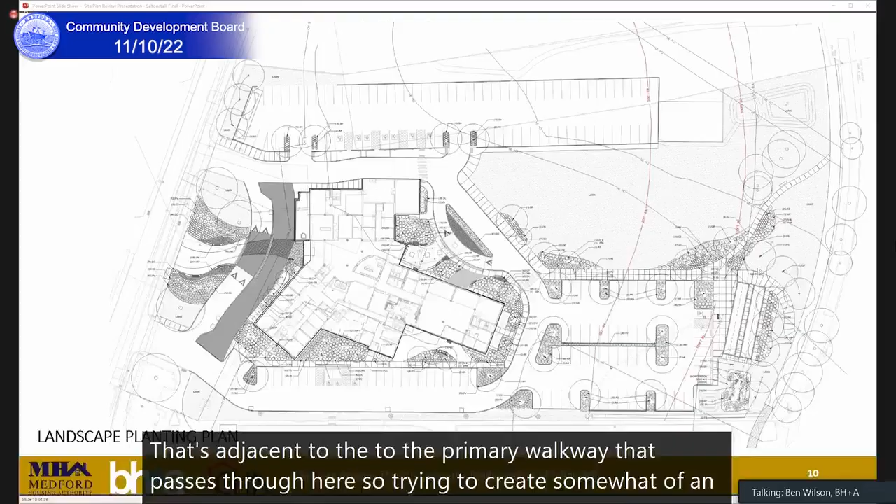I'm sure you're all familiar that we are looking at potentially a future development building in that general area. My question: we've addressed that landscape more as sort of an open space. We've planted and populated with some trees around the periphery adjacent to the primary walkway that passes through here, trying to create somewhat of an allée, and really just leaving this as a lot of this site currently is, which is lawn. I don't know if you have anything to say about that, Curtis, other than we're trying to minimize the scope of work in that area currently. It may be something that as time rolls, we take a different strategy, but I think this is kind of a clean and non-invasive approach.

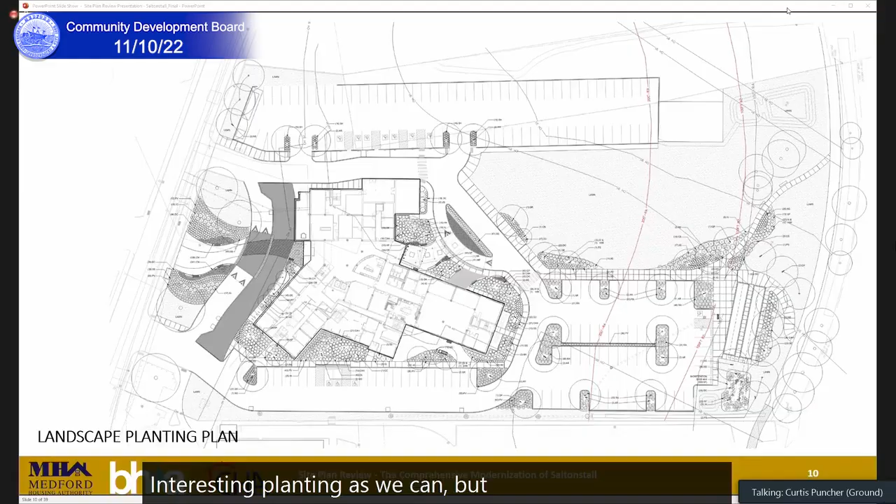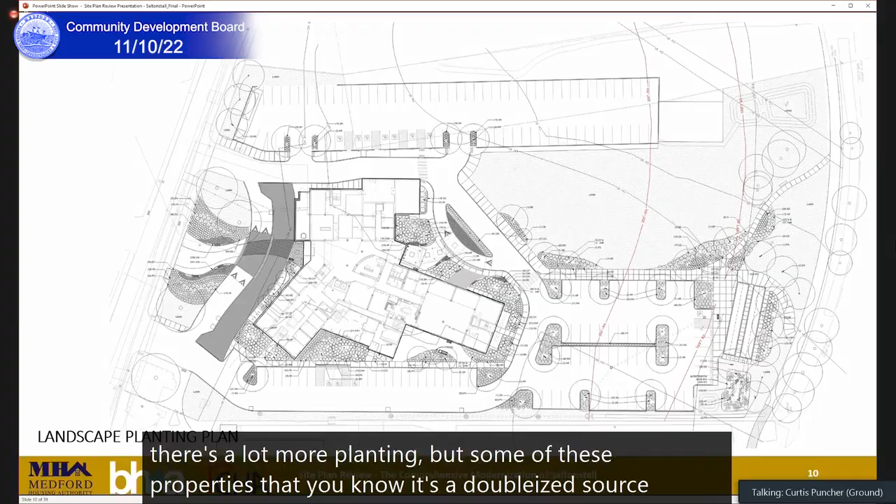Yeah, and the extent of planting, we wanted to walk the line between providing as much interesting planting as we can, but at the same time not overwhelm the maintenance staff at the MHA. We know the lawn is pretty straightforward, easy to get out there with the mowers, but the planting beds, a mix of grasses, perennials and shrubs, can sometimes be more challenging for maintenance staff. So we did have earlier versions with a lot more planting, but some of these properties, it's a double-edged sword - some of those beds may not be maintained properly. So we've scaled it back, pulled it towards the building, kept it tight to the paths, so it's easily accessible, easily maintained, and will ideally look good for the indefinite future.

You mentioned solar. Do you put charging infrastructure in a facility like this? Does that make sense for staff and residents? We did not. At some point I'm sure it would make sense, but we do not have that. The capacity of the building had gone up significantly because we've gone to more internalized equipment and upgraded elevators, et cetera. So we did not add any charging stations.

Charging stations for vehicles, is that it? Yeah. It's not part of this project, but I have been in discussions, and I know there are a lot of great government incentive and rebate programs going on for those. So it may be something we'd definitely consider putting in the future, but it's not part of this project. But if we have the ability to, and we have residents that would like that, it's definitely something we would entertain. I have been in discussions with a few vendors that provide those electric vehicle charging stations.